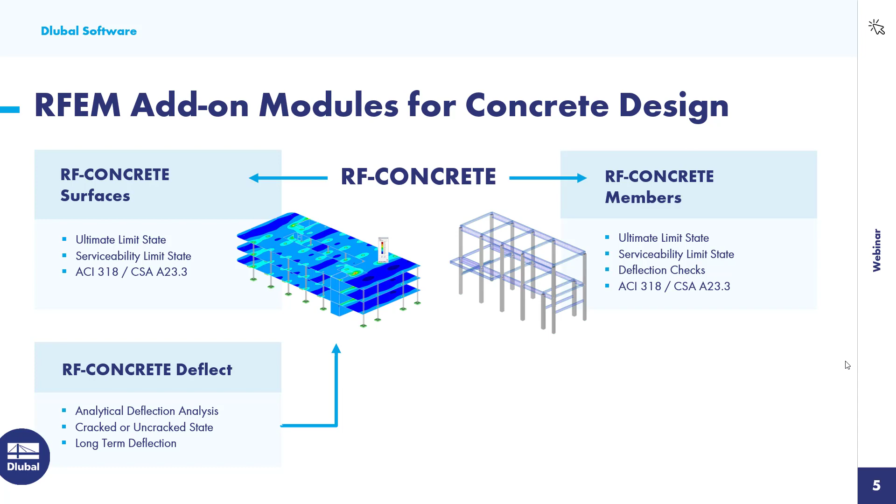In addition to these two main add-on modules, we have a couple of add-on module extensions. The first is RF-CONCRETE deflect. You have to have RF-CONCRETE surfaces in order to run this add-on module extension. This will perform an analytical deflection analysis for our surfaces in either the cracked or uncracked state. We also can consider long-term deflection.

RF-CONCRETE nonlinear will run a nonlinear calculation in the crack state for both members and surfaces. So this add-on module extension is applicable in both of these. This is for the serviceability limit state only. We'll actually take a look at the true crack cross-sectional properties and use this for the analysis.

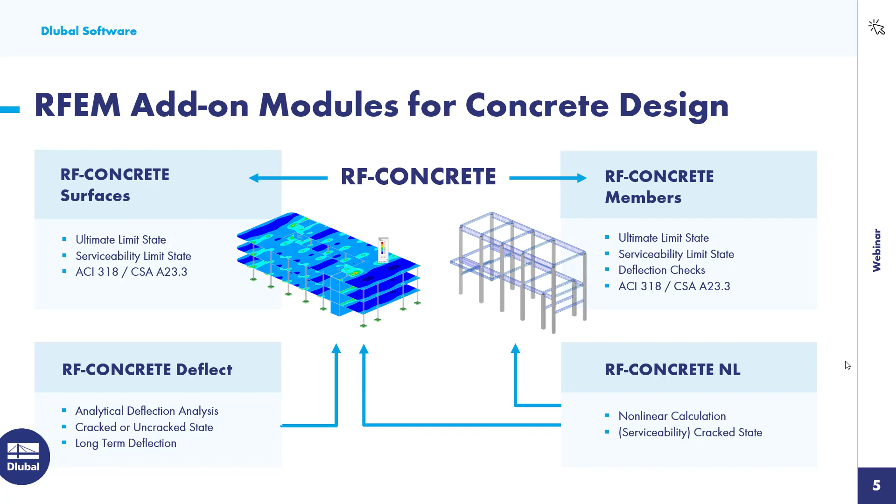Okay, so we can get into our first example today. You'll notice that I already have my concrete model here for the sake of time. It consists of a type of podium structure out in front here, and then we have 3 stories over on the left. We have our concrete core consisting of surfaces for our wall elements. We have horizontal slab elements, elevated slabs, concrete columns, and then we also have some beam elements here that we categorize as rib members, which I'll show you in just a minute.

So looking at our main FEA program, RFEM, we also have the project navigator over on the left that includes all of our input data. For example, I can take a look at all of my materials defined. In this case, everything is 4,000 PSI concrete. If we take a look at the cross sections in the program, we have our 12 by 12 columns defined pretty much everywhere.

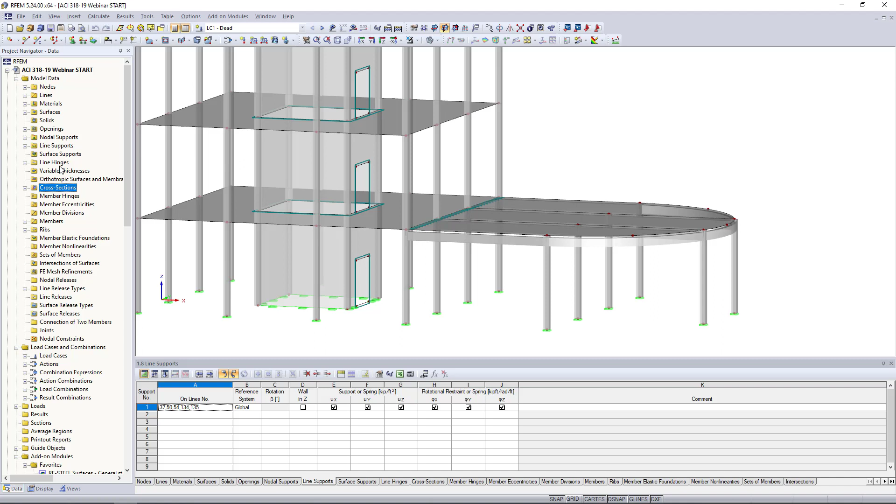We also have these rib members defined as 10 by 18 cross sections. So we can make additional changes here to our input data within the project navigator as we update this graphically, and the project navigator in turn will also update.

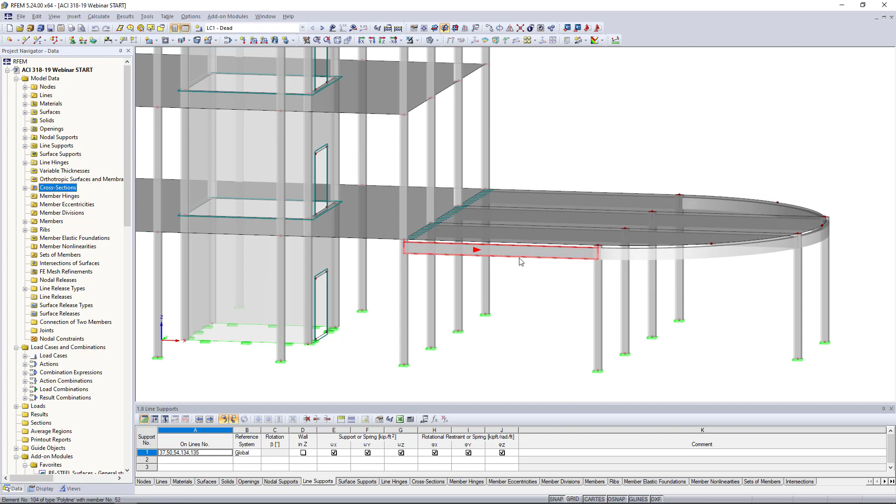Just to cover a few items within the model that may be a little unique, let's take a look at these beam elements here. Notice that these members are dropped down below the slab as supporting members. I can double click on one of these. The member type here, instead of being set to a typical beam type member, which would be a beam or a column, is set to a rib.

When we go into the detail settings of the rib, what makes this a little more unique is that, number one, we can drop it below the thickness of the slab automatically. Notice over on the left here, we can position this on the positive local Z side of the axis of the slab. Then we also can set an effective width on either the left or right side of the member. We can have this automated at L/6, L/8, or input it manually, which in this case I set to 1 foot on either side.

The program will automatically detect the surface that it should integrate with. The intent of this is that we can integrate this effective width on the left or right hand side and consider these internal forces for the member design. Once we get into RF concrete members, this is possible.

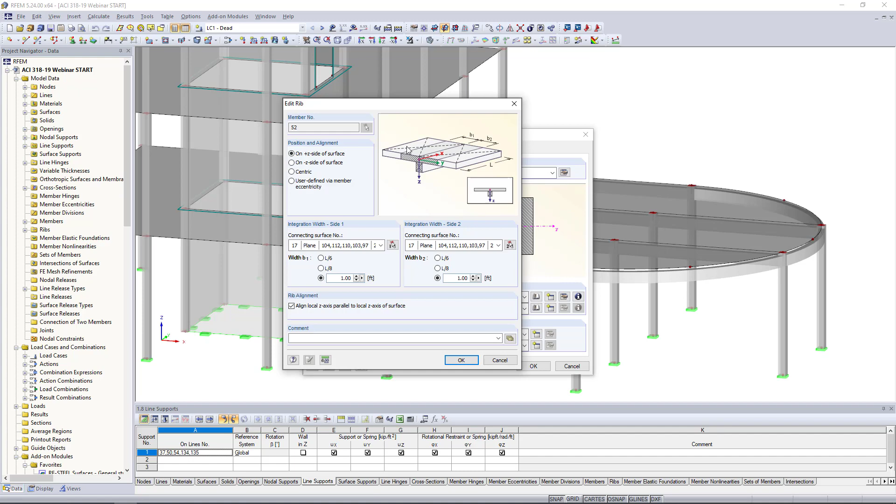So all of these members over here in this podium type structure on the right are considered rib members. You'll also notice this symbol here between our adjacent surfaces. I have my 3 surfaces here in the front, and my rear surface in the back, and then this symbol here is what's called a line hinge.

A line hinge can be added over here in our project navigator. We can right click to add a new line hinge, and what I've done here is I've released the moment between these adjacent surfaces. You'll notice that with a line hinge, we have 4 degrees of freedom. So we have the translation releases, but I want those all to be fully fixed.

But I can release the moment about the line's local x-axis. We're assuming that this isn't one monolithic pour, but rather these 2 slabs are kind of butting up against each other. Translation is transferred between the 2 elements, but we wanted to fully release the moment. You'll notice that these line hinges are applied along the length of these slabs.

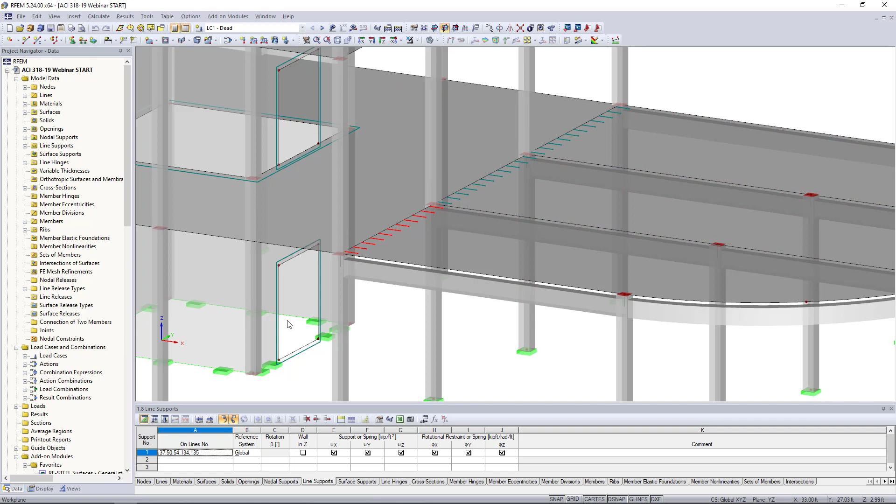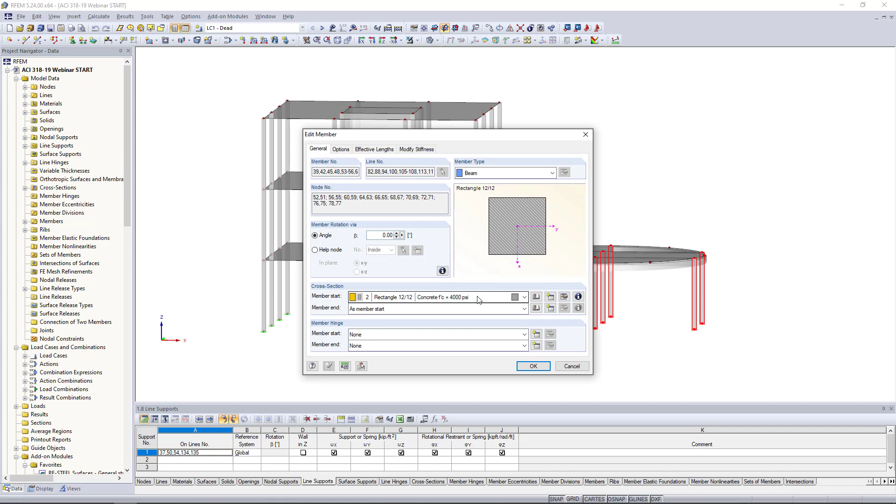When we are designing according to the ACI or the CSA, we know that an I cracked factor should be applied to the flexural stiffness of our members and our surfaces. So if I take a handful of these columns here and double click, you'll notice that we have the Modify Stiffness tab. By default, what we would normally see here is the definition type set to none.

When you are designing for concrete, you would want to come in here and modify this to ACI 318. The program will automatically detect, because of the vertical orientation, that these are columns. We can also see here now that a multiplication factor of 0.7 is applied to the flexural stiffness. This would be the I cracked factor from Table 6.6.3.1.1 directly from the standard.

Now, same concept for our beam members. If we initially edit this member, we take a look at the Modify Stiffness tab. We just want to change the component type here to beams for a different modification factor of 0.35 for the flexural stiffness.

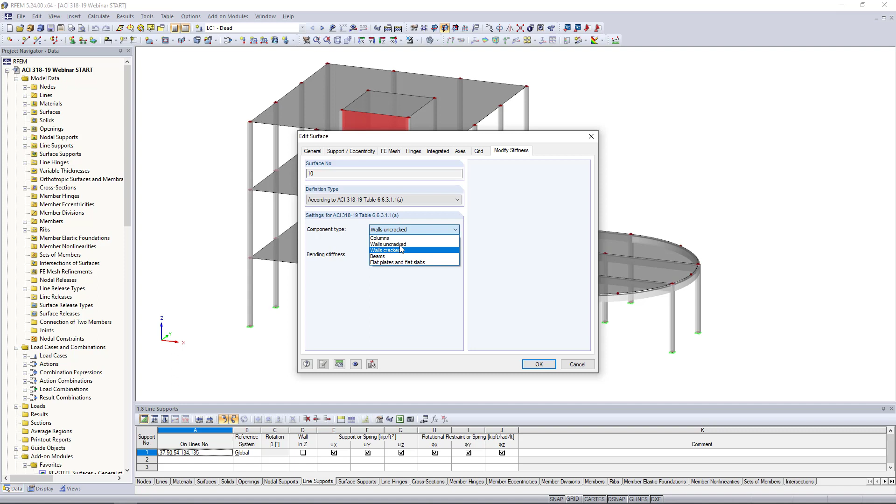Similar to members, when I look at any one of these slab elements, we also have a Modify Stiffness tab. Again, ACI, but the component type is set here to flat plates and flat slabs with a multiplication factor of 0.25. Finally, we have our wall elements with the component type set to walls, uncracked or cracked. This has been done for every element here within the model, and that is very important if we're designing to one of those standards that we want to take into consideration.

Before moving on to the loading, there's one more element I'd like to take a look at, and that's the FE mesh, which is incredibly important for any finite element program, that we are correctly setting this mesh size. Under Calculate FE mesh settings, you'll notice that the target length of the finite element by default is set to 1 foot.

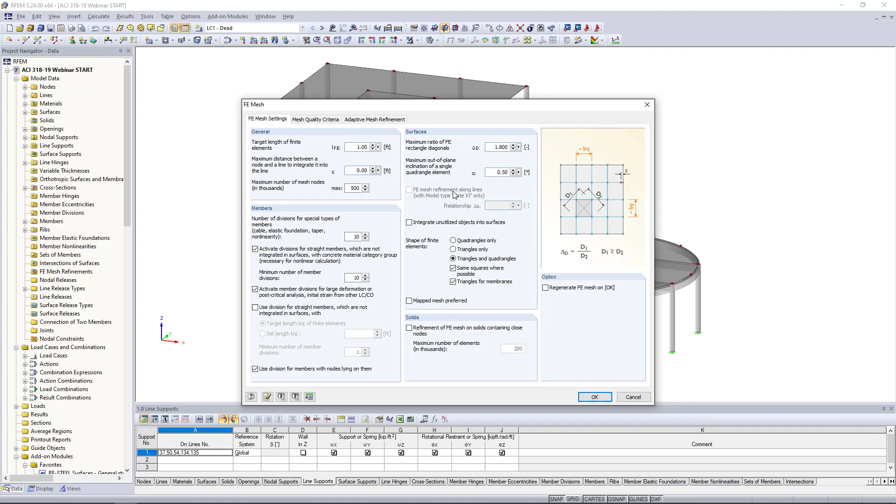So when I keep these default settings and regenerate the FE mesh by clicking OK, it quickly solves and we have our FE mesh available based on those 1 foot settings. Everything is tied together automatically, including nodes, lines, members, surfaces, walls. Everything is done by the program, so we don't need to do any of those factors manually.

But the question is, is this mesh too small? Is it too big? Will it produce accurate results? We have a nice feature here under FE mesh settings that's relatively new within the last few releases called the adaptive mesh refinement. This is a tool within the program, and I'm going to jump back to that PowerPoint to explain this a little bit further.

We always have this question in any FEA program: is my mesh too big or too small? We know that if we set the mesh to something too big, we're not going to get accurate results because we're only getting results at every FE mesh point. But if you set it to something too small, sure, your results will be incredibly accurate, but you may be waiting hours, possibly even days, for the model to solve, depending on how big the model is.

So what we typically recommend is a manual result comparison with FE mesh variation. This means we set our mesh to something we think would work, run the analysis, and take a look at the results. Then we decrease the mesh and compare our results to the decreased mesh from the larger FE mesh. If our results are changing drastically, we know we need to continue decreasing the mesh until we're not really seeing any variation within the results.

Now, this is a manual process. What this adaptive mesh refinement tool has allowed us to do is automatically perform this process instead. The FE mesh is automatically recreated based on the results from the previous calculation step. This is based on the Zienkiewicz-Zhu method. Essentially, the program will take a look at the results with one FE mesh setting and compare it to the FE mesh results for something where we have refined it.

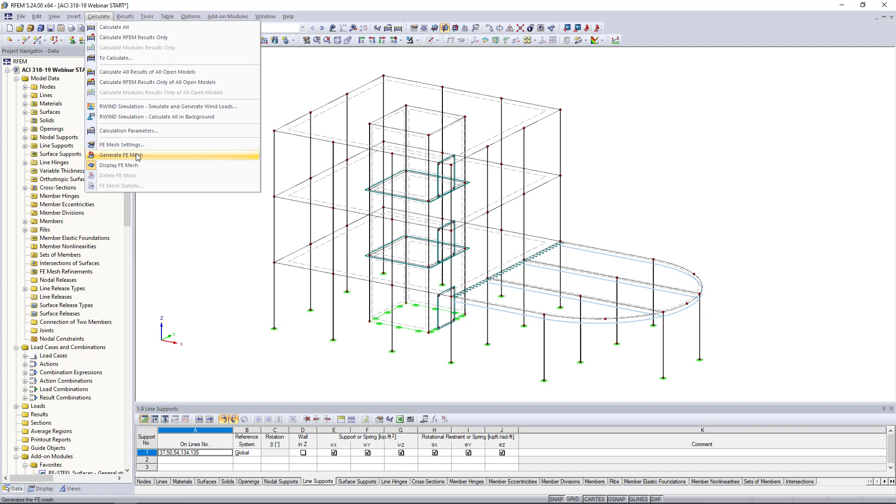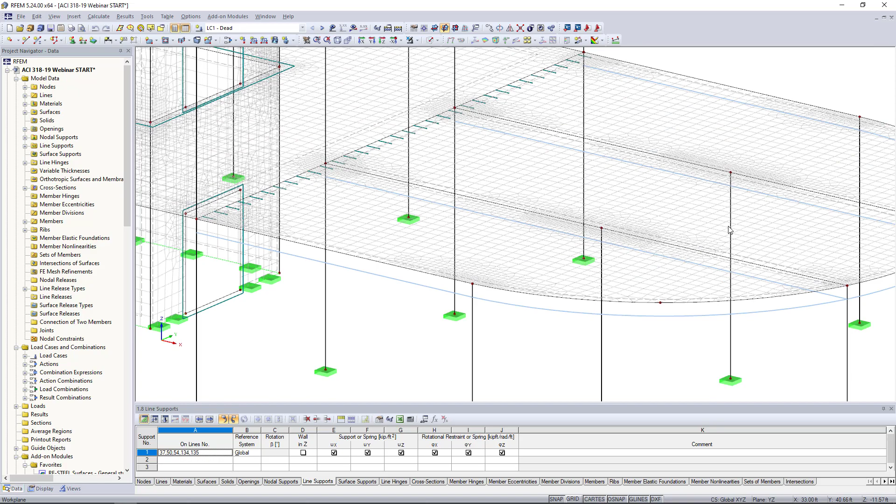When I go to calculate, generate FE mesh, the model looks as though it's almost running an analysis calculation, but in reality it's just comparing those results from one mesh to the other, taking into consideration that error tolerance. Once this is complete, we now have a finer FE mesh, especially where these columns are framing into this 2D surface. We also have a much finer FE mesh where these wall elements are meeting at these corners. This is a pretty powerful feature if we just want to automatically apply all these mesh refinements.

Now, I've given plenty of webinars before where I've manually applied FE mesh refinements to my model.

If you're looking for more control, you would want to manually add these FE mesh refinements, which is available in our Project Navigator. This is a great feature if we want to quickly refine the FE mesh to have a reliable FE mesh length size across the entire model.

Now that we've completed a quick overview of the modeling of the structure, let's move on to loading. Under my load cases and combinations, you'll notice I have created just a few load cases here. In reality, for a true model, we'd probably want to set many more, but for today's example we have a dead load case, a couple live load cases, and a wind load case.

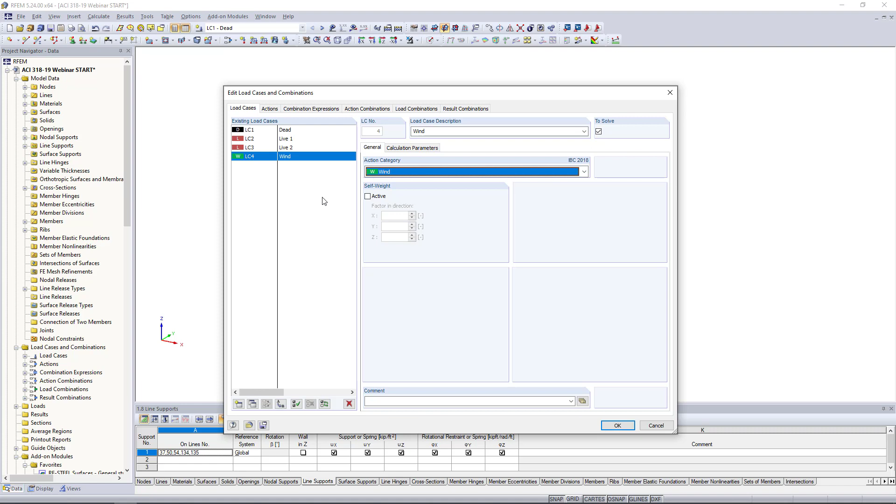These action categories are important because they set the load factors in our load combinations, according to the IBC, since those are the load combinations I'm generating today. When we look at our combination expressions, you'll notice I have my LRFD load combinations and my ASD, and I can click this info button to see directly from the IBC 2018 what those load combinations look like.

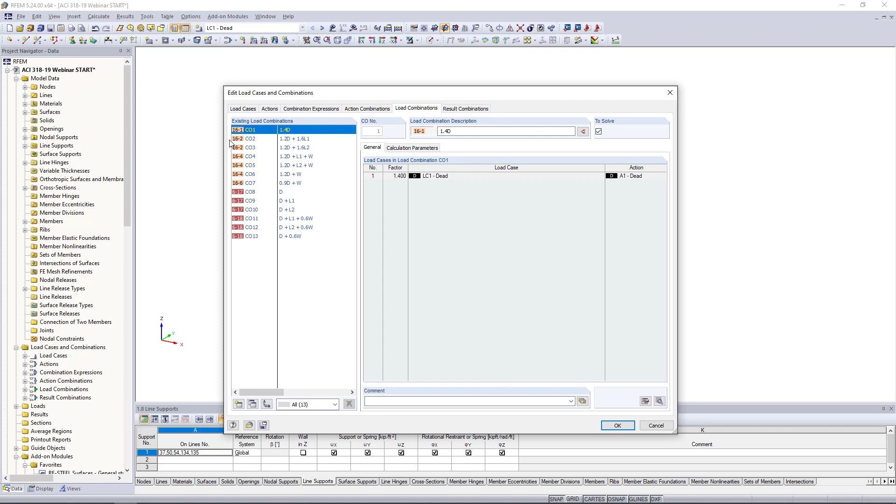Most importantly, under the load combinations tab, here are my LRFD load combinations listed in orange and my ASD listed in red. All load combinations by default are set to a second order analysis considering P-delta effects, which is required by the ACI.

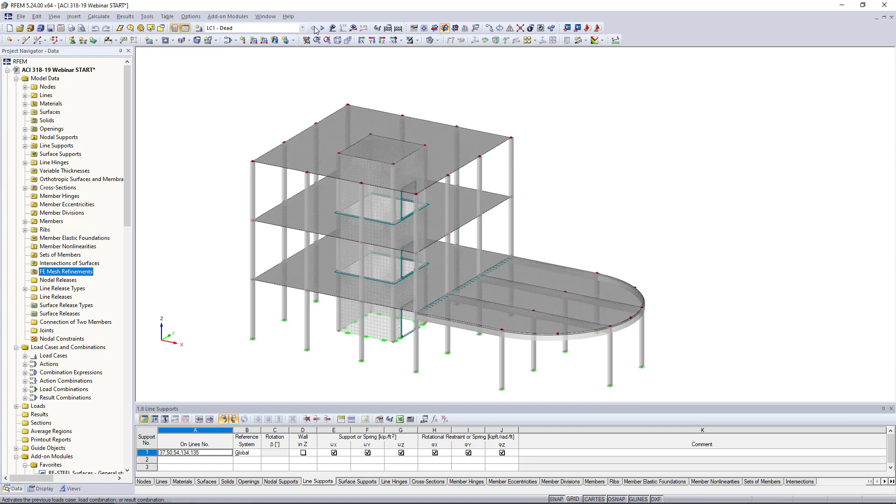Once we're done setting up these load cases and combinations, we would apply the loads to our structure. Taking a look at the dead load applied, these are just simple surface loads applied to every level, 0.05 kips per square foot.

Taking a look at the live load, we've added quite a few free loads. Notice these free loads are applied to only particular sections of these surfaces, not everywhere. Looking at our second live load case, we have a different arrangement here, so this might be live load considerations we wouldn't want to consider together, but one or the other.

So I've set up my load combinations so that they're not considering both live loads together, but rather the load combinations will consider live load 1 or live load 2. Finally, a simple lateral load is applied to every diaphragm level, every story level, in the global Y direction.

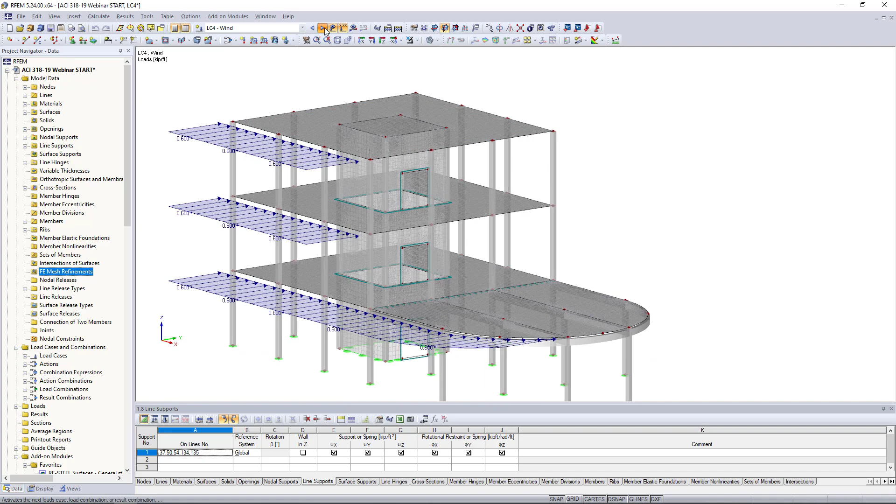Nothing too complicated. Now we can view our load combinations displayed together, which shows our dead load, our live load, and our wind load acting on the structure. Now that we're done defining our loads, we're ready to run our calculation.

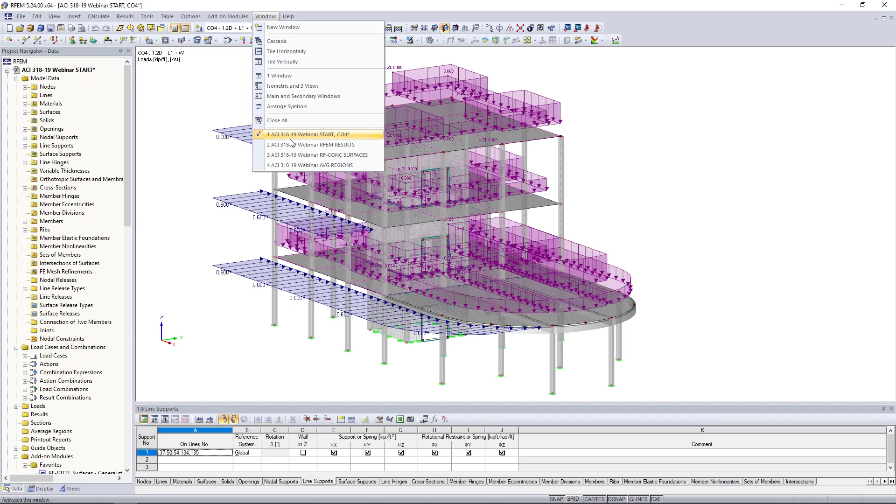I can go to Calculate All. For the sake of time, I'm going to pull open a model that I've already run this calculation on, since it does take a minute because of some of these additional FE mesh refinements. So what we're presented with here are our results once we run our calculation.

The results tab is now available in our Project Navigator, and we can view our global deformations for all of these different load cases and combinations. Notice you can control the display factors here to decrease this.

We have our colored panel within the global deformations, and we can also smooth the color transition to make this look a little nicer. Deflections are important to make sure we understand that our model is behaving correctly under the applied loads, or if we made a modeling error. Everything looks to be okay for the general deflection.

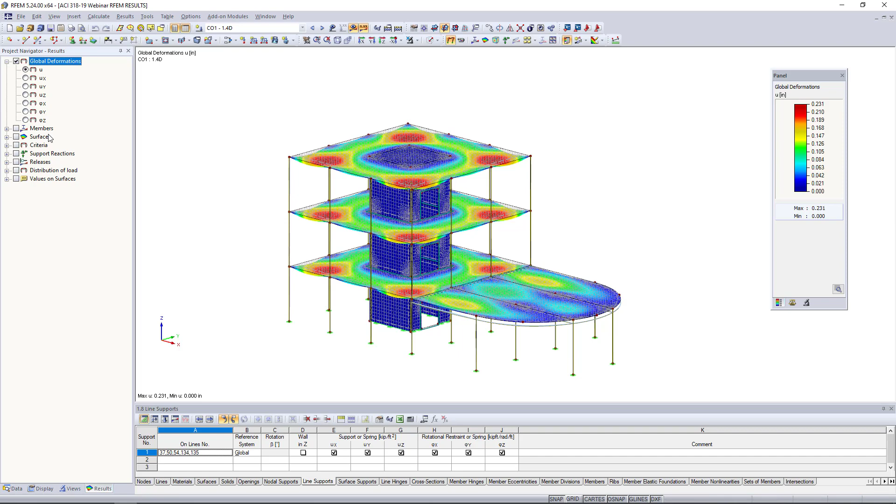In addition to our global deformations, we're probably very interested in our internal forces, and we'll start off with the internal forces for our members. I'll isolate a few columns here by choosing the visibility of the selected objects.

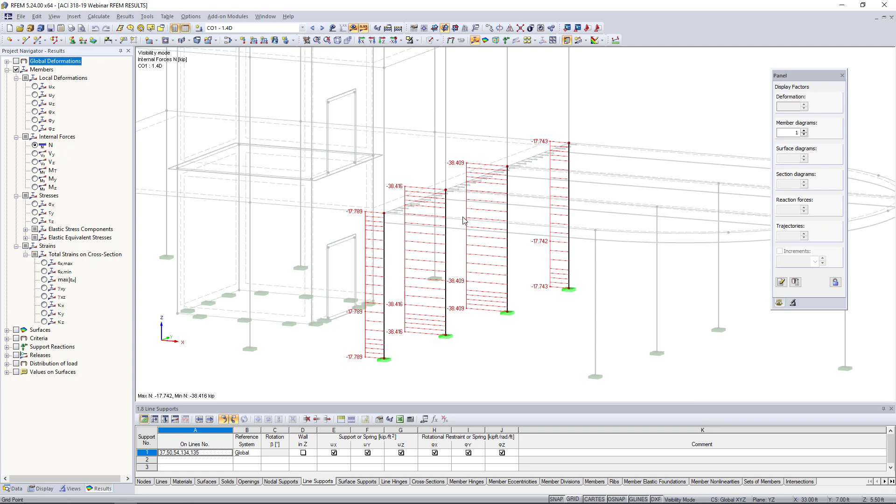When we look at these columns, we can view the axial loads, and we can see all of these are in compression, as we would expect. We can also view the shear forces in the strong and weak axis directions, and we can view the bending moments as well in both directions, and so on.

All of this information we're viewing graphically is also available in table format. So we can view Table 4.0, the results summary, and take a look at the members for the internal forces.

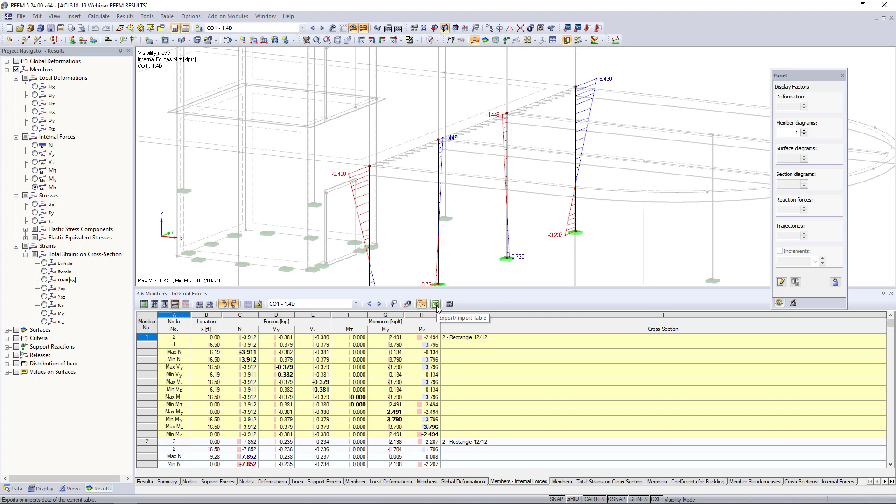All of this information can be exported directly to Microsoft Excel with the click of a button. This is important if we're wanting to do our own manual design with our in-house tools or maybe an Excel spreadsheet

We can also right-click on a member to visit the results diagram, which will show me in more detail my internal forces, deflections, and strains along the entire length of the member. We can switch load combinations or load cases at the top, export this to Microsoft Excel, and add it to our printout report.

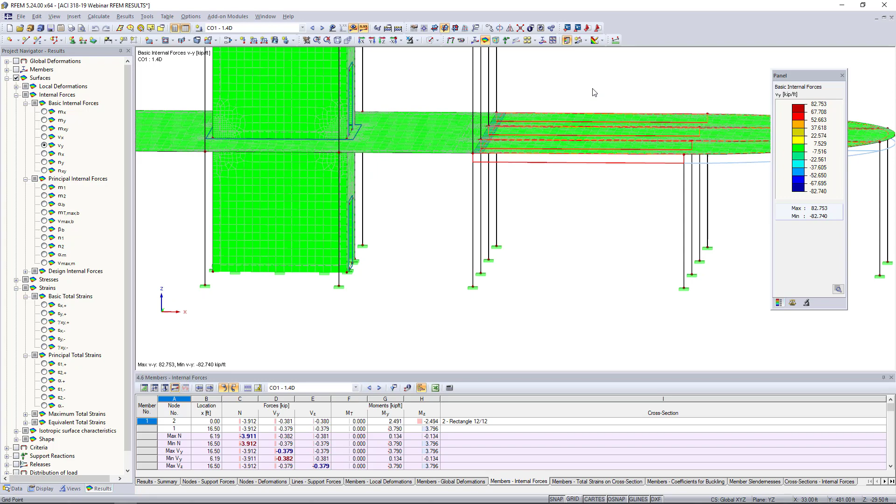So this sums up a basic overview of our member analysis results. Let's take a look at our surfaces. I'm going to cancel my visibility mode here, and instead of all surfaces, let's isolate these front surfaces by creating a visibility by selected objects, so we can take a look at the basic internal forces for this member.

We have our colored panel here showing us our MX bending internal forces. We can also cycle through different load combinations and view MY. These basic internal forces are based on the X, Y, and Z axes, the local axes of our surface. When I hover over one of these surfaces, we can see the local axes given to us.

When we're looking at the principal internal forces, the next available tree here, you'll notice everything is based on these principal axes, which are the extreme values of the internal forces. So we have M1 and M2, for example, where axis 1 is based on the max value of our internal forces, and M2 is based on the minimum values - just a different way to present our results here.

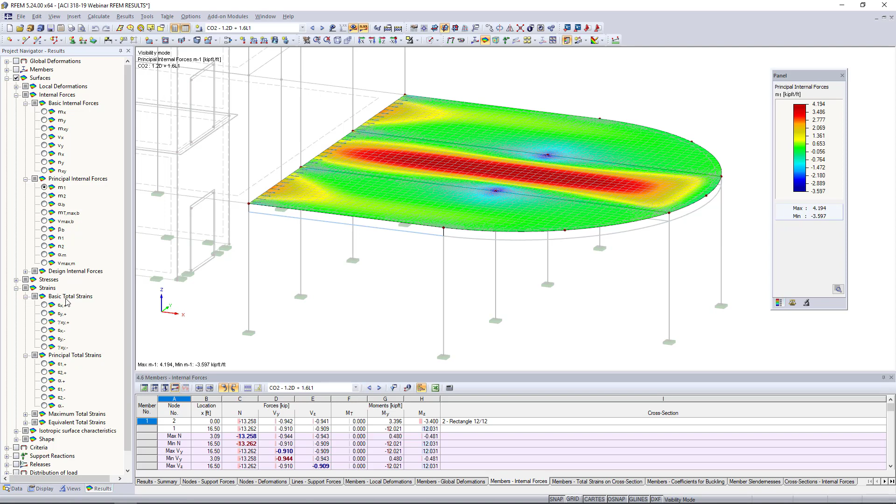Now, of course, we also can view strains. Strains might be interesting for us for concrete design. So everything is visible here.

This information is available to us in table format. If we scroll all the way to the right-hand side within the tables, we can view the strains, or we can view the internal forces, and this is for every grid point within the surface. So we can export this information to Microsoft Excel, again, if we'd like to do our own manual design.

So the next topic, after we've covered the analysis, is of course we want to design these members according to the ACI standard. Assuming we want to take advantage of our add-on modules within the program, we can see these listed within our project navigator. You can always right-click on an add-on module to make it a favorite, to move it up to the top of the list. Or we can access add-on modules under design concrete for RF members, for surfaces, or for members.

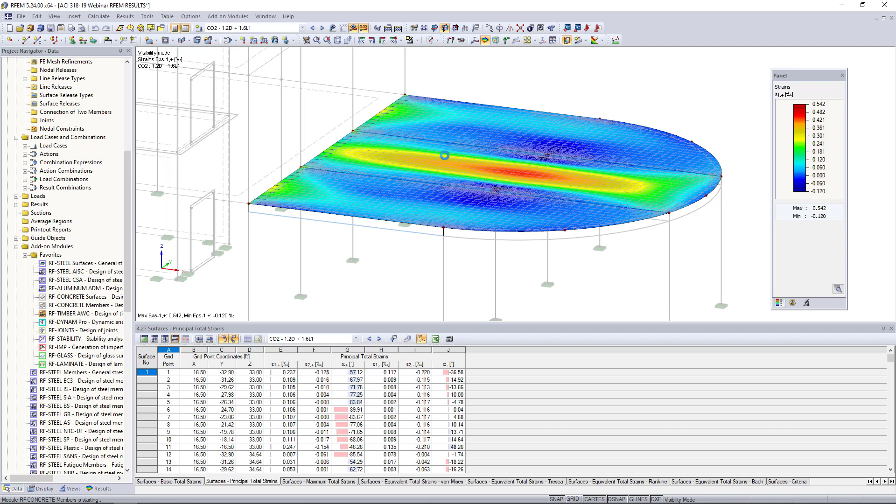Before we jump into the actual add-on module, I want to go over several of the 2019 updates that have been considered within the program. I'll preface this by saying this is by no means a complete overview of all the modifications or updates within the 2019 standard that was recently released, nor a complete list of everything affected within our program. It's just a few I wanted to highlight, some major changes that took place.

So the first is the reinforcement strain revisions. According to section 7331 for non-prestressed one-way slabs, but also 8331 for two-way slabs and 9331 for beams, the code tells us these should all be tension-controlled elements according to table 21.2.2.

You'll notice that in figure R21.2.2B from the standard, which I pulled over here, our tension controlled area within this graph for the strength reduction factors has now been modified. This lower limit strain value has been modified according to this section here.

So we're now taking into consideration the yield strain in the extreme layer of the longitudinal reinforcement plus 0.003. Previously this value was just a simple 0.004 in the 2014 standard, so this was a major change within this section. Now, this leads to a more economical flexural design for beams and slabs. We don't have this requirement anymore to add additional tension steel to meet the lower steel strain limit of 0.004, but rather now this is a function of our yield strength of our reinforcement.

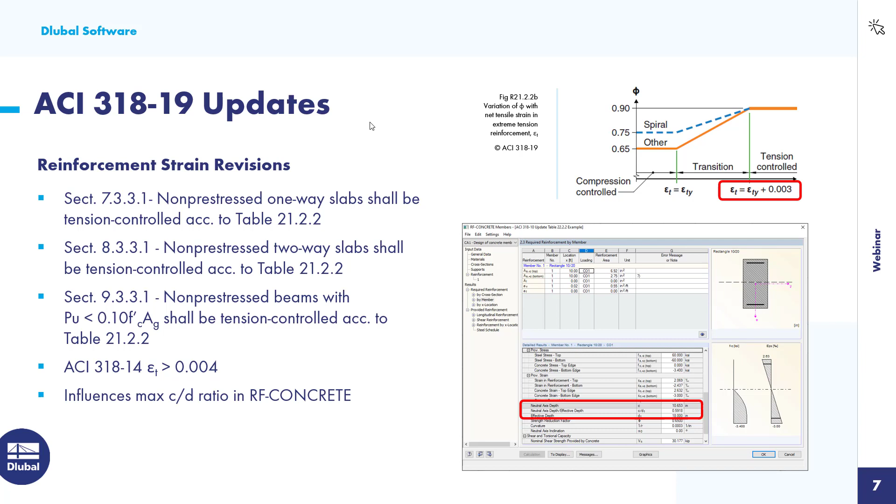So what this previously meant was really little, if any, gain to the flexural strength because of the reduced strength reduction factor. This is obviously going to affect our add-on modules, RF concrete members and surfaces in several ways, but the main change you'll notice initially is an influence on the neutral axis to depth ratio, which you can see in the results within the add-on modules.

The next update was the minimum flexural reinforcement for slabs, section 8611 for two-way slabs. AS min is now 0.0018 times the gross area. Previously in the 2014 code, this minimum area was based on the reinforcement type and grade, so now it's a more simple approach, just times the gross area. This is the same requirement as temperature and shrinkage, but the code wants us to apply this to the tension face of the slab element.

How this influences our add-on modules: this purely affects RF concrete surfaces, and it's going to influence the minimum longitudinal reinforcement. So we'll see those updates within the add-on module there.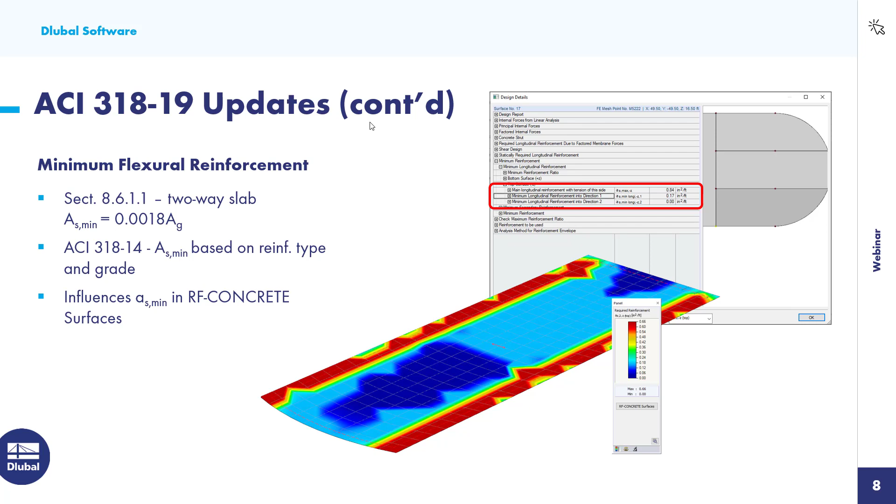We've also introduced the size effect modification factor, lambda s. The code tells us that previously, if a member depth doubles, the shear capacity of that member may not necessarily double either. So this size effect modification factor has better control over that rather than simply doubling the value. Again, ACI 318-14 previously had provisions for equations for members without axial force versus members with a compression force versus members with a tension force. So again, much more simplified.

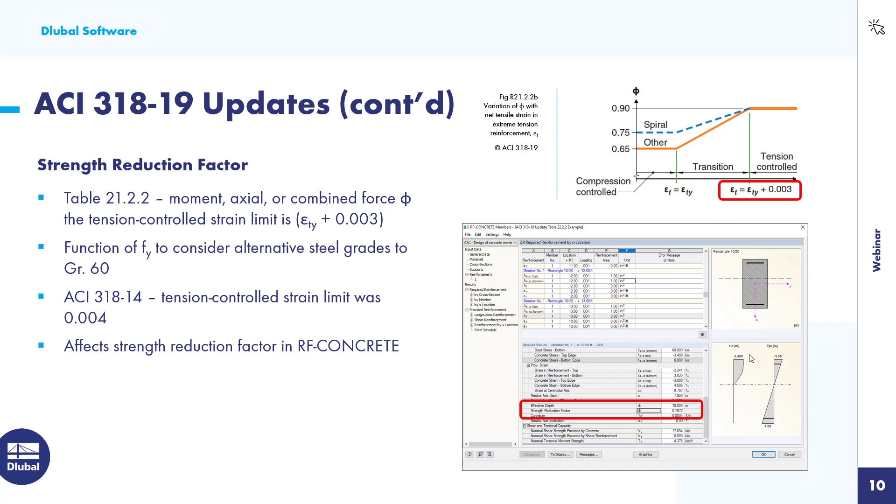Serviceability requirements, from table 24.2.3.5. There are now revised equations for the effective moment of inertia, I sub E. We can see that from the table over here on the right-hand side, taken again directly from the standard. Previously in the 2014, the equations underestimated the member deflection with low reinforcement ratios, and this was primarily slab elements. What we'll see now is that this will inevitably affect the deflection calculations in both surfaces and the members add-on module.

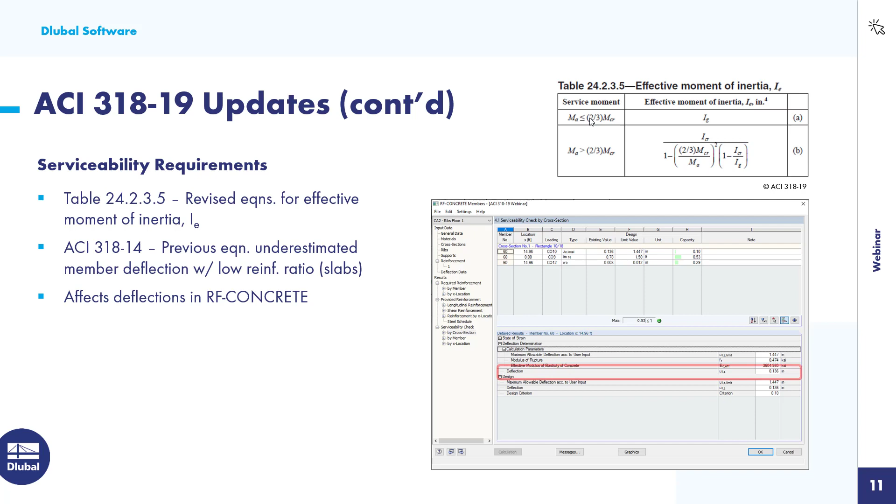Okay, so let us go back to our example today then, and let us continue on with the design within these add-on modules.

So you'll notice that when I speak of add-on modules, it's nothing more than this dialog box that will come up within the main program RFEM. And we will want to select here now the ACI 318 standard. You'll see the 2014 still available in this drop-down box.

We can even click this filters button to show even older standards if we'd like. The strength limit state will be our LRFD load combinations for consideration on the right-hand side. Our serviceability will be all of our ASD load combinations. Notice we can activate a nonlinear calculation, which will activate that add-on module extension, if we remember way back when from the PowerPoint, for RF concrete nonlinear, but we won't be utilizing that today.

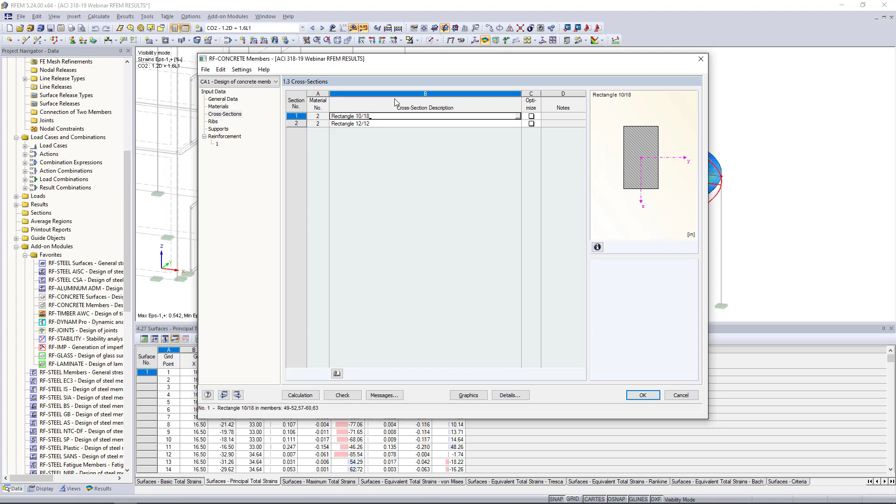Now it's really just as easy as moving down the list here. So we have our materials. 4,000 PSI was brought in from the main program RFEM. We would set our reinforcing steel grade here. We'll use grade 60. The cross sections are also both available to us here: our 12 by 12 sections, our 10 by 18 sections. Our ribs table is showing us all of these rib elements, if you remember, that are taken into consideration the effective width.

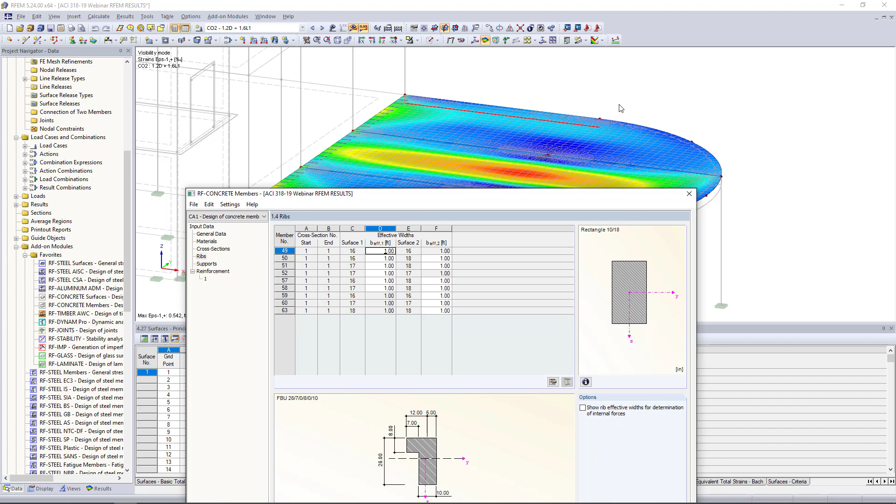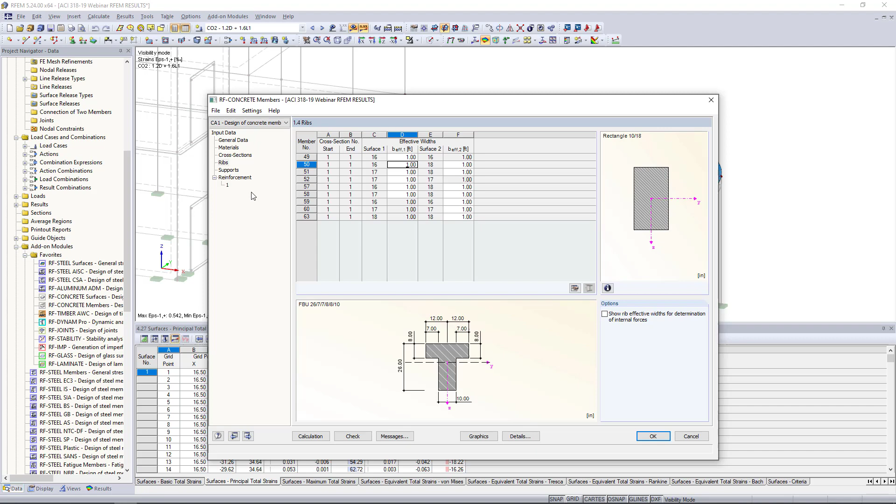So the program has recognized that we've set an effective width of 1 foot. It's also smart enough to know there's no surface on the left-hand side of this member, so we don't really want to consider that. Of course, you'll notice it looks more like an L-shaped beam. But when we look at some of these additional members embedded in the interior here, which you can see highlighted in red as I click on it within this table, well, it looks more like a T-beam here because we have effective width on both the left and right-hand side. So just reiterating that information because we can design these rib members within RF concrete members.

These supports - what this means is that we can graphically select supports here. Let me cancel this visibility. We'll turn off our results here. And I can select nodes. You'll notice node number 63 and node number 71 if I was designing this rib member out in front here.

The supports allow me to define the support width, and in this case, this would be our 12-inch columns that these rib members are framing into. Is it a direct support, or is it framing into the face of this column? Is it a monolithic connection? Is it an end support, or is it not? And you'll notice this picture updates automatically over on the right-hand side.

The whole intent of this is, number one, we can consider a moment reduction according to 6.6.5. This is unchecked by default, but you can take that into consideration. But more importantly, two, we can reduce the shear forces based on a distance D away from the support face according to 9.4.3.2. So that's the intent of these supports. We won't be designing the ribs for today's example, but just to give you a brief overview.

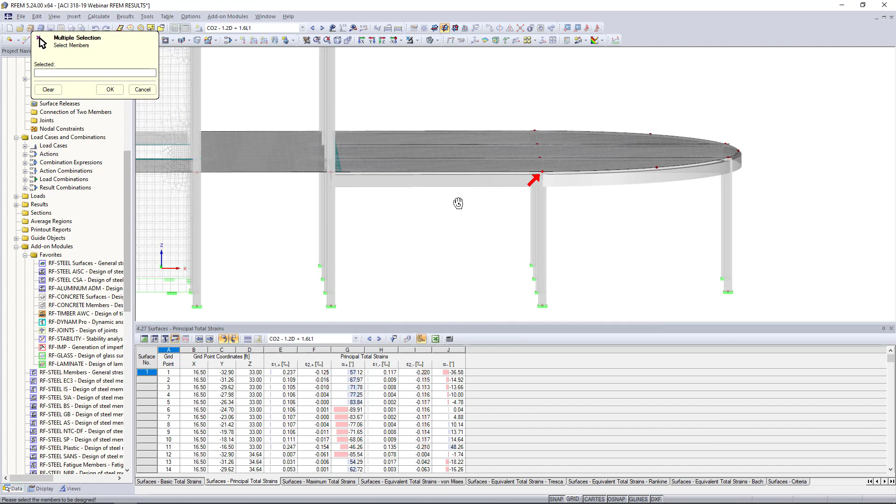And finally, we have our reinforcement tables. So what this allows us to do is to lay out the reinforcement for our members. We'll begin by giving this one a description, so we'll design just a few columns. Now, rather than applying this reinforcement to all of my members and designing all of them, let's just choose our 4 columns down here at the bottom with maybe a little bit higher axial loads that we can initially design. So you can see those listed here.

We want to define the longitudinal reinforcement. So what I can do here is choose a couple reinforcement diameter sizes. Maybe I only want to choose one for the program to select from, and this will essentially optimize based on the best design setup. The minimum spacing is set to 0.75 inches. The anchorage type is also selected from this drop-down. Notice this picture will update depending on our settings. We will calculate the development lengths as well.

The curtailment type allows us to define different reinforcement zones. So if we need higher longitudinal reinforcement for bending in some areas of the member but not others, we can actually optimize that. No curtailment just means we're going to place the same longitudinal reinforcement throughout the entire length of the member, but we can modify this to different zones if we'd like.

The ties and stirrups. For this, I'm going to select number 4s, for example, from my checkboxes here. We can set the number of legs per section, set the anchorage type, and also control the spacing.

Similar to the longitudinal reinforcement, we have the ability to use uniform spacing throughout, or we can change these to zone-related spacings. Spacing limits is checked by default to consider the maximum stirrup spacing according to the standard, the ACI 2019.

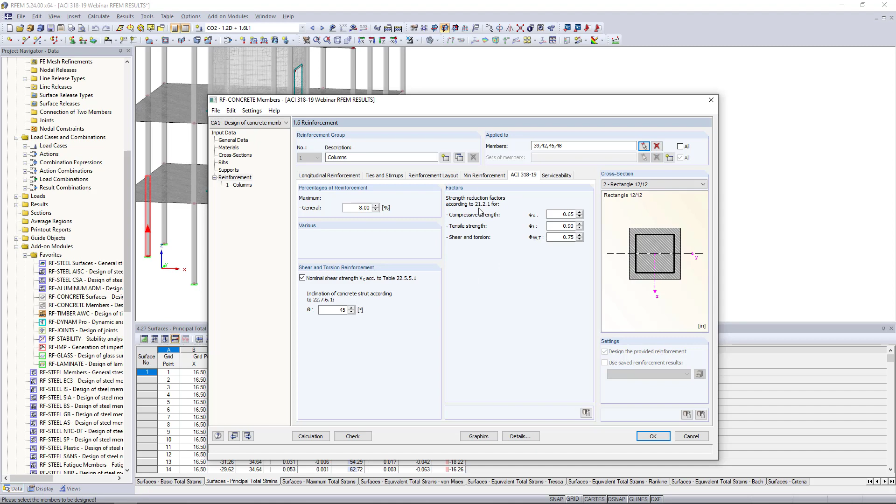The ACI 318 tab is specific to the standard. It has some additional settings, such as the percentage of reinforcement, shear and torsion reinforcement according to chapter 22, and our strength reduction factors, which come directly from chapter 21. So no modifications to this table here.

Serviceability allows us to set a limiting value for the allowable crack width. Within this drop-down box, we have some suggestions from the ACI committee on different allowable crack widths. For our case today, we'll choose this last one for a dry air protective membrane, 0.016 for both the top and bottom crack width.

This first setting, to design without direct crack width calculation, refers to the longitudinal spacing requirements set by the code to limit cracking. So we can leave this checked, and the program will optimize that spacing to make sure it meets those requirements.

Design with direct crack width calculation is more of a theoretical approach. We will apply the Gergely-Lutz equations to actually calculate the crack width. So both of those we can leave checked.

Now we also can turn on the deflection checks, and notice we now have a new table available to us, deflection data. We can also activate long-term deflection according to chapter 24.2.4.1, which applies a time-dependent factor to our deflections based on the duration of the load.

Now looking at the deflection data, you'll notice all 4 of my members are listed, with the reference length including the full member length of 16.5 feet. The pre-camber, we could add that in as well.

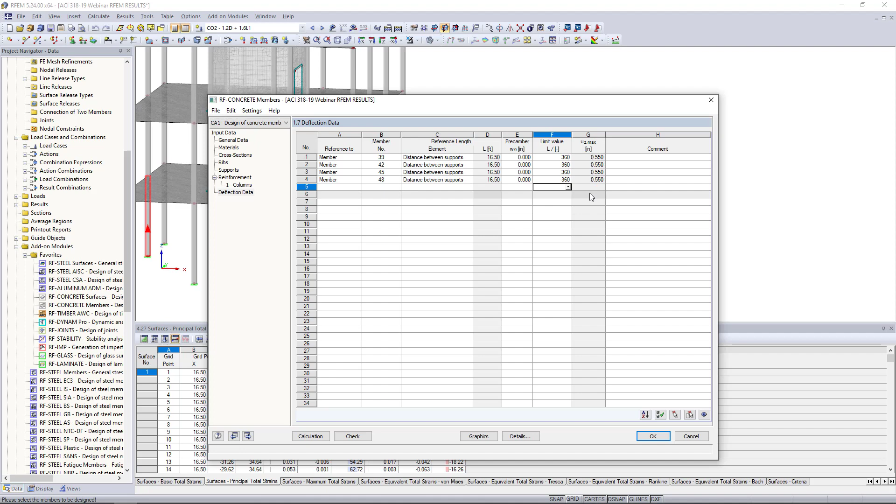The limiting value we can select from this drop down, or we can use our own user defined. For this option, we'll choose L/360. What I can do is hit F8 on my keyboard to make that same change to every single cell as I move down my list. So now my limiting deflection is going to be 0.55 inches.

So now we are ready to run a calculation, and you'll notice that this will actually solve very quick. We already have our internal forces from the analysis. All that we're doing is applying these equations from the ACI to determine our reinforcement.

You'll notice it does take just a minute though. The program's kind of thinking here, and you can always look at the progress down in the lower left-hand corner. It's calculating the sums and deformations. But the point is that the program will essentially take in all that information from the RFEM analysis into this add-on module.

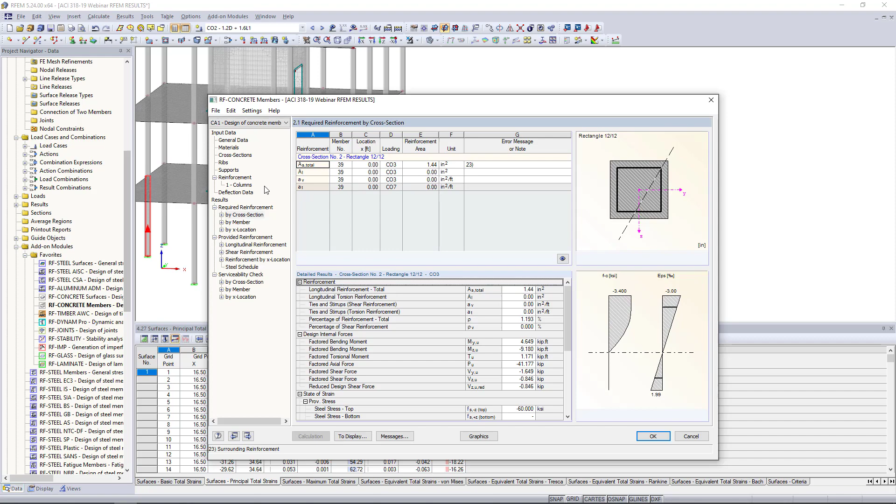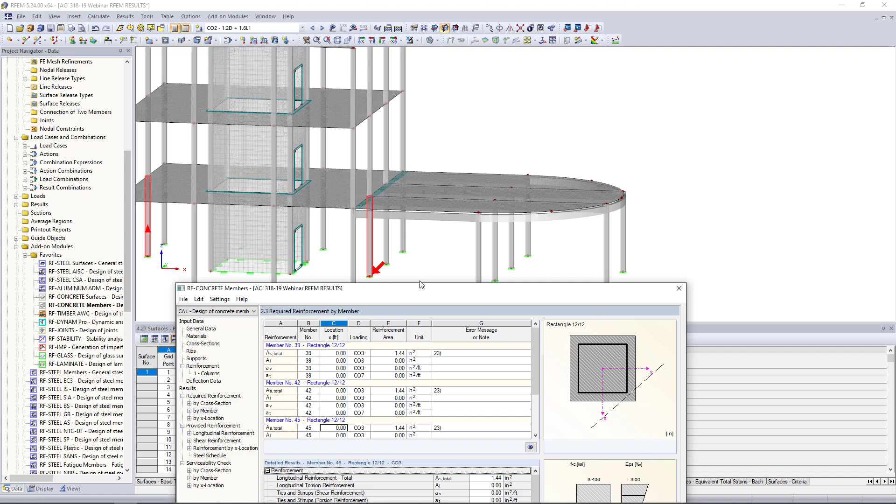Once this calculation is done, what we're going to see is the required reinforcement by member. So what I can do is take a look, and you'll notice my member here is highlighted, probably from when I was in RFEM last, and everything's synced up in the program to the tables within this add-on module. So it's nice to know exactly where you're at.

What we're going to see here is the required reinforcement from the analysis, and this is going to include our longitudinal reinforcement, our shear reinforcement, as well as torsion requirements.

Okay, so once we have this required reinforcement and the given variables are shown here, we'd like to know what the program is actually designing for this member, and that's under provided reinforcement.

For example, we can take a look at member number 39, and this is the longitudinal reinforcement. The program has come up with 4 number 7s located at the corners here. Same concept for the shear reinforcement. We take a look at the program has designed 53 number 4s at about 4 inches on center.

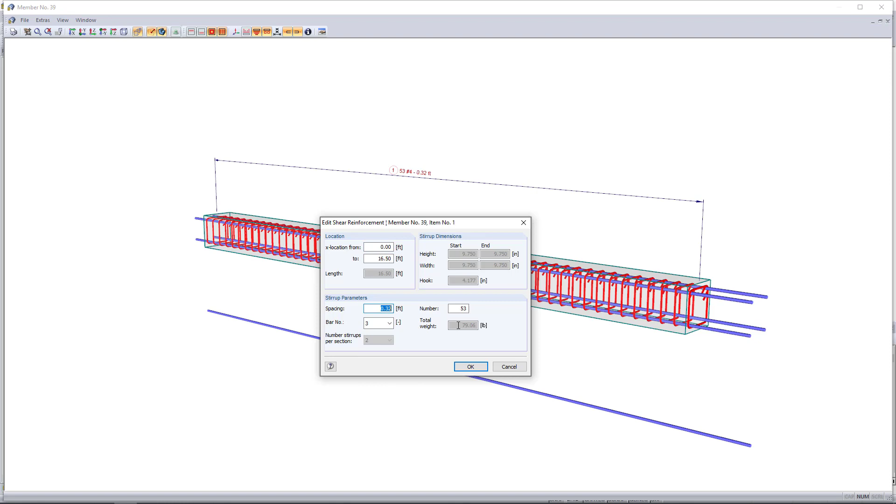What's nice is we can double click within this picture to be taken to a much larger view of our concrete rendering here. If I want to make any changes to the reinforcement, I can do so directly within this picture. I double click on the 53 number 4s. Maybe we want to change this to number 3s here, and we want to do the spacing as 0.25. Who knows? We click OK. The program automatically updates this picture, and I can exit out of this.

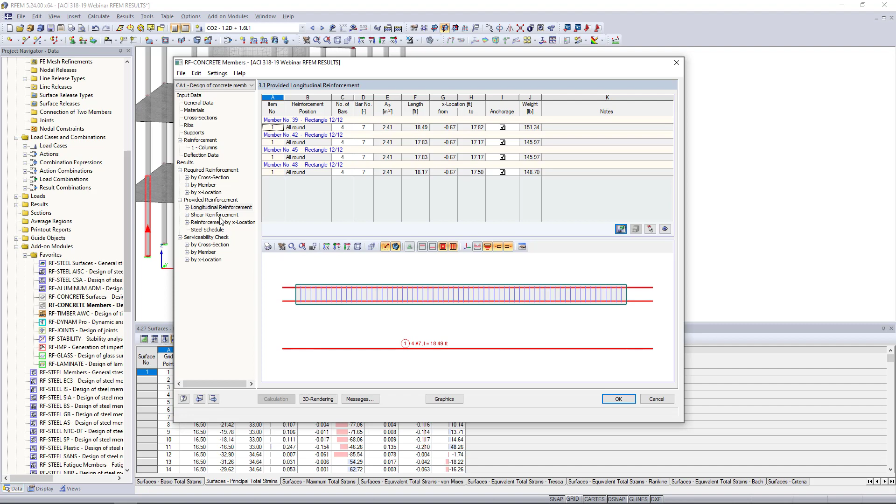When I try and go to a different table, the program says, well, wait a minute, you've made changes to the reinforcement. Let me just recalculate real quick to make sure that you're still meeting all of the requirements. So it does so, and it looks to be that everything is okay.

We also have our serviceability check. Remember, we're checking deflections, we're checking the limiting spacings, we're also checking the crack width. Overall, we're seeing for all of our members here, each of these individual checks with an overall ratio of 0.46. So we have our green smiley face because we are below 1.0. Everything looks to be good there.

Now, in addition to all of this information, which we can take a look at here, we can also take a look at the graphics view. So we are technically within this add-on module RF-CONCRETE members. We are just viewing our results graphically here within RFEM.

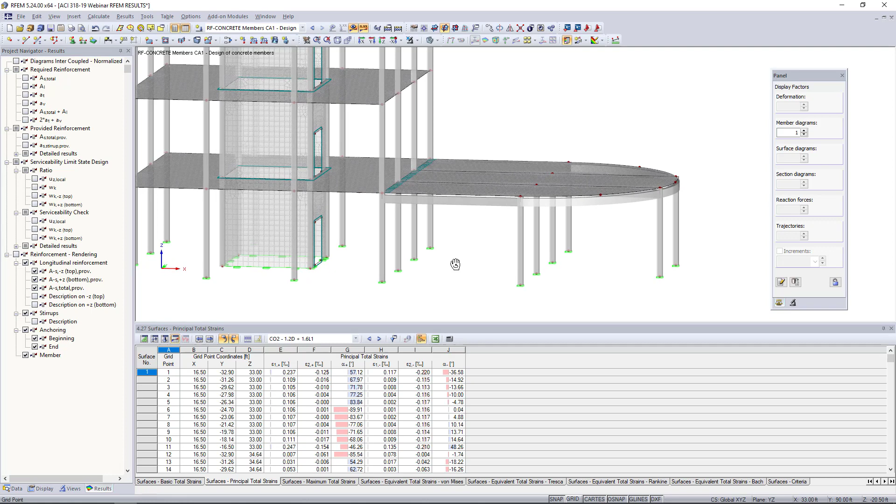Let me take a look at the visibility by the selected objects, and we can zoom in here. We can view the required longitudinal reinforcement for each one of these members. You'll kind of notice how this varies along the member length.

What else we can overlay on top of this is the provided reinforcement. So what we should always see is the provided reinforcement greater than the required reinforcement, of course. And sure enough, we do at 2.41 inches squared.

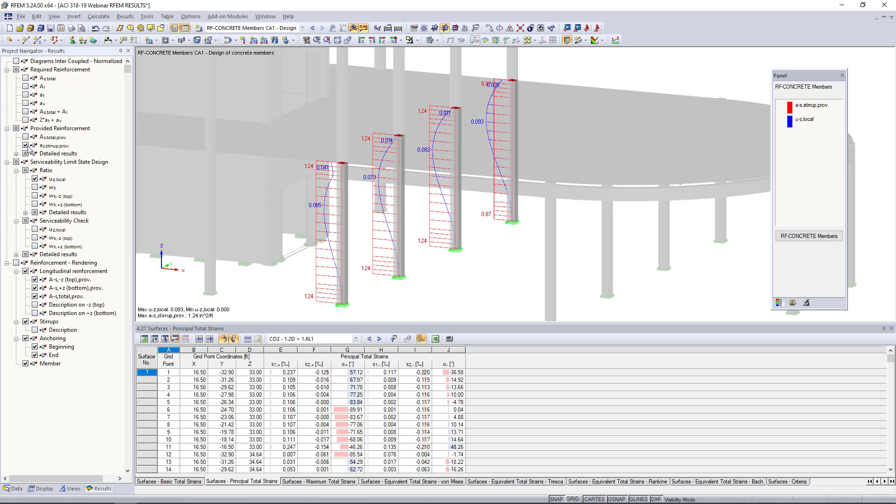Now we can view all of this other information as well, such as serviceability for our deflection ratio checks and everything else. So this is all possible to view graphically.

We also can turn on the rendering of the reinforcement. So this is just a nice view if we want to see all of these stirrups, our longitudinal reinforcement, our development lengths, kind of extending up into that additional column there. So that is a basic overview of RF-CONCRETE members.

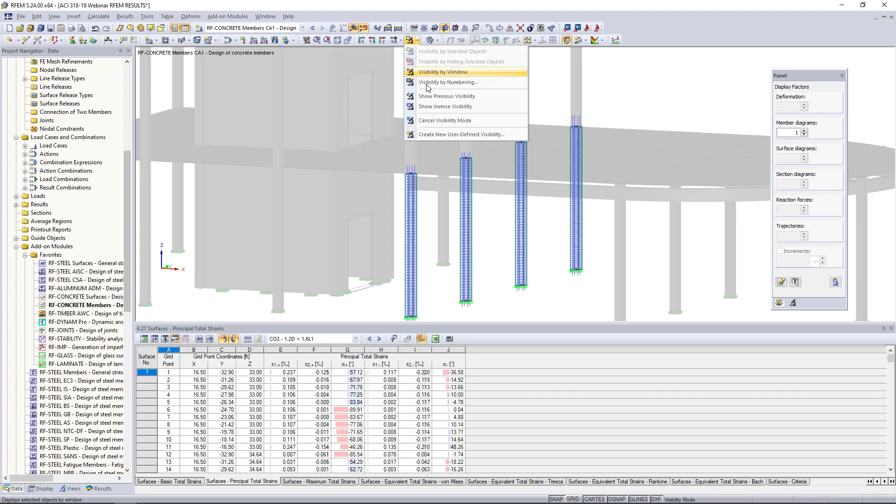Now we would like to move into RF-CONCRETE surfaces. So what we can do here is to jump to our data tab, and we can launch now. Let me cancel this visibility mode, we'll turn off our results. Let's take a look at RF-CONCRETE surfaces.

So what's nice about this add-on module is that once you have kind of found your way around RF concrete members, RF concrete surfaces looks almost the same. And this is true for all of our add-on modules. They have the same type of look and feel to them, so each one isn't different.

We are going to select the ACI 318-2019 here from our drop-down box. The strength limit state, we can select our LRFD load combinations. We can choose our serviceability limit state as well by choosing our ASD load combinations.

Under the detail settings for serviceability, I want to point out that when we go to these edit settings, we have the ability here to activate RF concrete deflect. So this is that add-on module extension we covered in the PowerPoint that is going to allow us to calculate the deflections here for our surfaces. Now this includes long-term deflection with that duration here, where we can take into consideration the time-dependent factor as well. We can turn this off as well.

We also have tension stiffening here. Essentially, we know that the reinforcement will take on tension loads. This is clear, but between two cracks, tension stresses are actually transferred into the concrete as well by a bond.

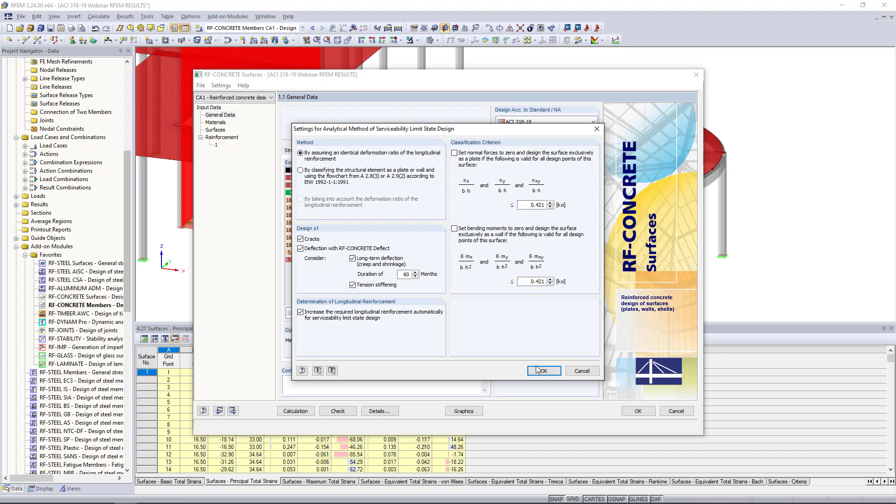So if we wanted to consider that, we can turn this on. You can also visit the help file, which maybe explains this in a little bit more detail, but by default we'll just go ahead and leave that on. RF concrete nonlinear can also be activated within this add-on module, again for surfaces.

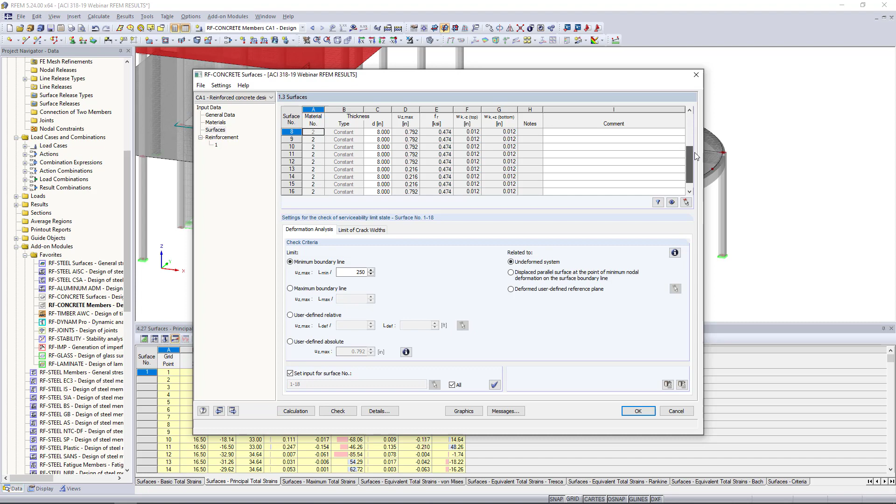So taking a look at the materials, again, 4,000 PSI concrete, reinforcing steel is set to grade 60. I take a look at my surfaces. We have all of our surfaces listed here. This includes all of our walls and our slabs. You'll notice, again, everything is synced up in the background here, which some of these surfaces are a little bit higher than my view.

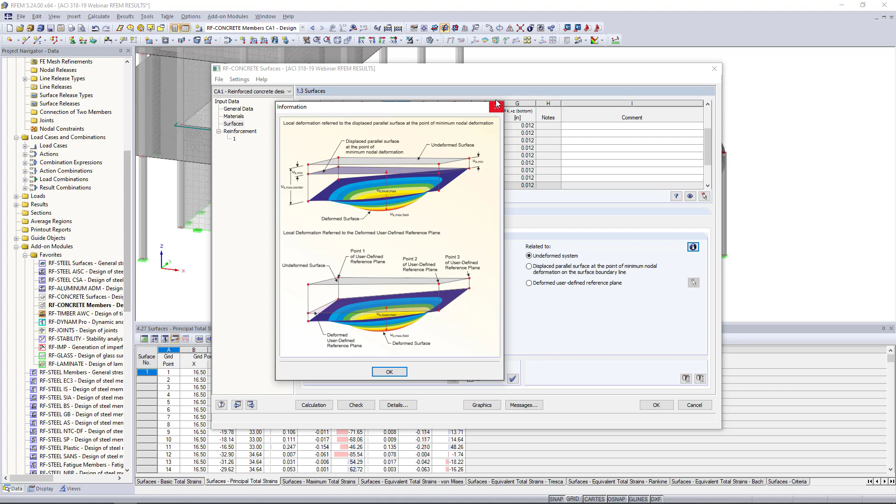For today, we'll be referring this to the undeformed system. Now notice this is applied to all surfaces, but you don't necessarily have to. You can uncheck this and apply to separate surfaces.

The limit value of crack widths, this is identical to what we saw within RF concrete members. We can set our limiting value here based on the ACI committee's findings for dry air protective membrane. 0.016 inches is our limiting crack width. We're going to consider longitudinal spacing based on 24.3.2 to limit cracking. We also will use the Gergely-Lutz equations to design with the direct crack width calculation.

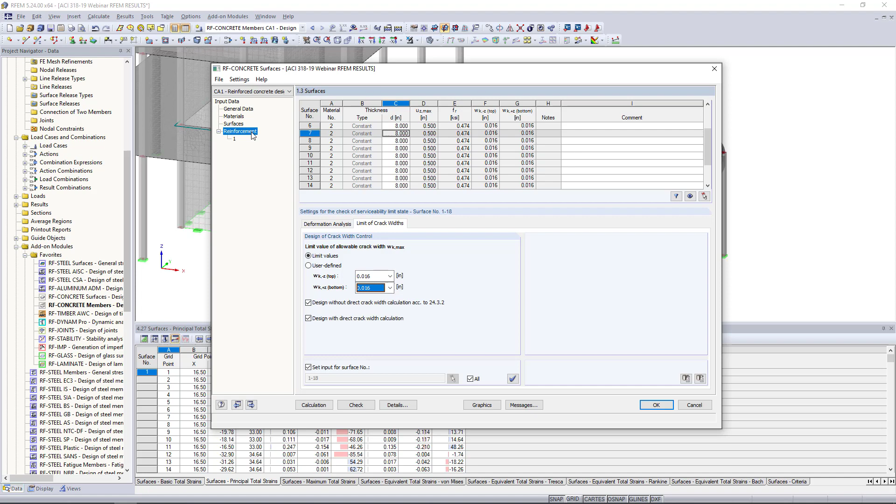So moving on to the reinforcement. The first thing we want to do here is to maybe give it a description, so we'll call this one slabs. And rather than applying to all surfaces, I am going to just design these surfaces out here to begin with, surfaces 16 through 18.

Now the reinforcement ratios, we can see here that the minimum secondary reinforcement by default is set to 20%. So this is the largest longitudinal reinforcement that should be applied. Now all the rest of these reinforcement ratios are based on a cross-sectional area of 1 foot wide within our slab. For example, maximum reinforcement percentage, 9%, again this is based on a 1 foot width of our slab.

The reinforcement layout. So the first thing to define here is our cover, whether that's to the centroid or to the edge. Let's choose the edge here. And again, referring to table 20.5.1.3.1 within the ACI, let's set this to 0.75 inches.

And notice that you can modify the reinforcement direction as well. It doesn't necessarily have to be along the local x-axis. We can change this at some type of angle as well.

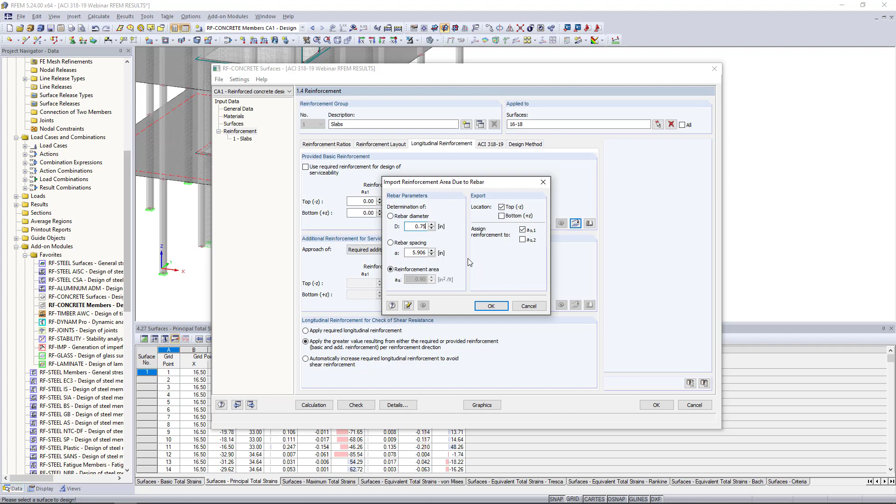The longitudinal reinforcement includes the provided basic reinforcement. So if I know within this slab that I am going to apply at a minimum number 6s at 12 inches on center, we can actually input that in for the basic considerations of the initial analysis. I can import the reinforcement here within my settings, and I can choose a rebar diameter. We know number 6s are 0.75. The rebar spacing will be 12 inches, and we're going to apply this to the top and bottom and in both directions. So when I click OK, the program will automatically calculate this reinforcement area, 0.44 inches squared per foot. Again, this is what will be taken into consideration for that initial analysis.

Now, the other option you have here is to use the required reinforcement instead. All that you need to do is to have the program, or we'll define the diameter here, and the program will determine the reinforcement area needed.

And that's what it will use for the serviceability analysis as well. This takes into consideration the required reinforcement from the ultimate limit state, and uses it as the applied reinforcement for the serviceability limit state - the additional reinforcement for the serviceability state design.

If the program determines these number 6s at 12 inches are not adequate, it will go ahead and apply additional reinforcement. What do you want to use for the serviceability design? Your options are available within this drop-down, and my biggest piece of advice to understand what these are is to take a look at this info button, which explains perfectly what you are setting for the serviceability limit state design if our reinforcement is not adequate, based on this green line here.

So we will just leave this as the required additional reinforcement. If we need any additional reinforcement, let's go ahead and use number 6s here with 0.75 inches for our diameter setting - the longitudinal reinforcement to check the shear resistance.

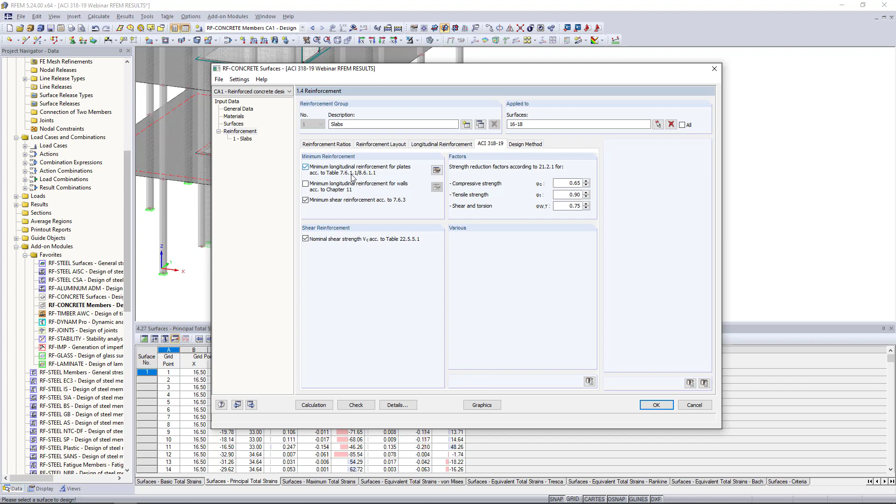The ACI 318-19, specific to this standard - we're going to see here the minimum longitudinal reinforcement for plates according to 7.6.1.1 and 8.6.1.1 for one-way and two-way slabs. We are going to want to keep that for today to take into consideration those minimums.

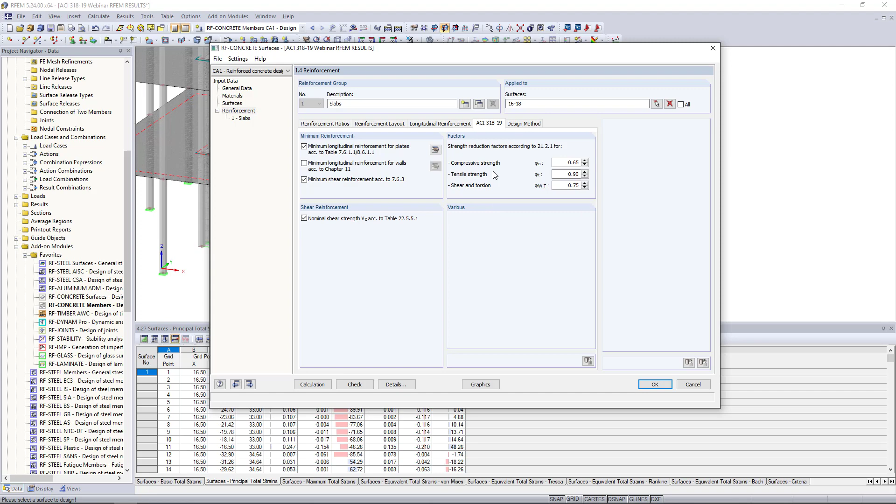If we were designing our walls, we'd probably want to uncheck this and check this option instead to use the minimum longitudinal reinforcement for walls according to Chapter 11. Minimum shear reinforcement is according to 7.6.3. Shear reinforcement according to table 22.5.5.1, as well as the strength reduction factors, all come directly from the standard.

For the design method, we're going to choose the optimization of design of internal forces for parts loaded mostly by bending or tension, and we are ready to run our calculation.

For the sake of time, I am going to jump into an already saved model here, and you can notice that it's just taking a minute to load these saved results. So let's just give the program one minute.

Essentially, once again, we are going to take all of the internal forces from the RFEM analysis, but RF Concrete Surfaces is a little bit more complex with what we're seeing than with RF Concrete Members. So it does take the program just a minute to calculate those.

Jumping to this already saved model, what we will do here is go to the current module since it is selected from the drop-down. And what we will notice after we've run our calculation is our required reinforcement.

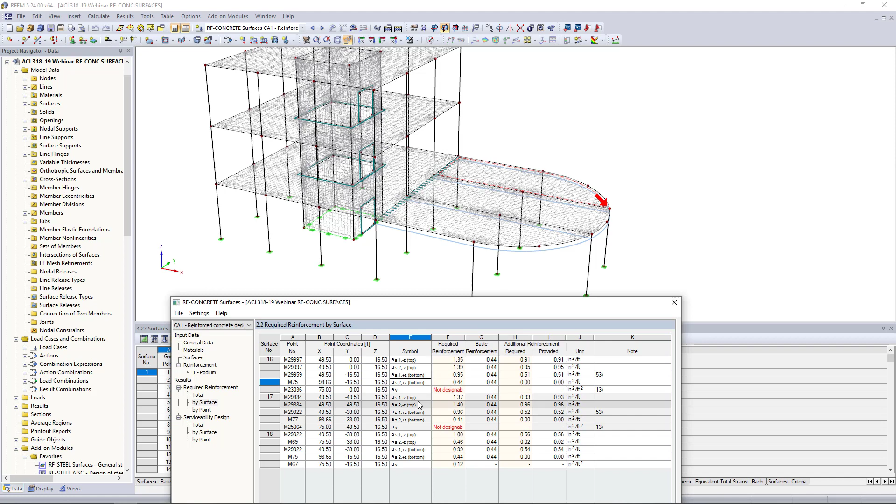And we can view this required reinforcement by surface, for example. Everything's kind of synced up here to show us our required longitudinal reinforcement for the top and the bottom, in both directions. This red arrow is showing you exactly where the controlling internal force is.

Now, of course, we can't help but notice this red text here that says that the shear is not designable. And when I click into this cell, it tells me the shear resistance cannot be checked because the cross section is entirely cracked. So this is obviously a problem, and we'll get to it in just a minute.

Notice we have the required reinforcement here from the calculation. We have our basic reinforcement, which is my number 6s at 12 inches. And then we have an additional column here that says, okay, you still need to provide an additional so many inches squared of reinforcement here in order to meet this required reinforcement. So that's given here.

Also notice that we can view this drop-down box according to the ultimate or the serviceability limit state design. When we are in one of these options, ULS, we can click this info button here. This info button will allow me to expand all of the information that went into these calculations. So you can see that it's rather complex with all these different trees.

We can view the shear design. We're also going to give you really as much information as we can from the standard, where all the variables are coming from, code references if they're applicable. So this is certainly something if you want to understand a little bit more detail.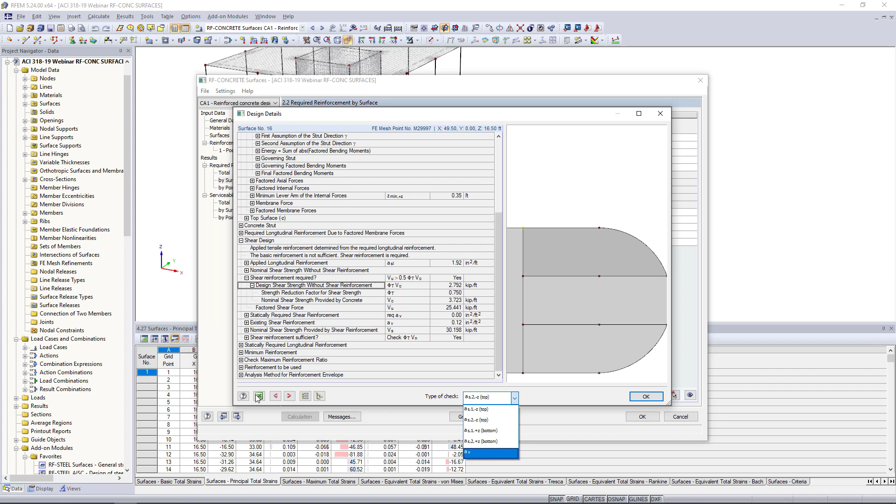We can also take a look at any one of the longitudinal reinforcements, and we can export this to Microsoft Excel to really understand where our numbers are coming from.

Under the serviceability design, just like what we saw with our members, we can view by surface our deflection checks, spacing requirements for our longitudinal reinforcement, and crack width calculations. Everything's passing quite well with a max ratio of 0.7, shown with our green smiley face. We can click on this info button to get information for the serviceability, including all the information that went into determining it.

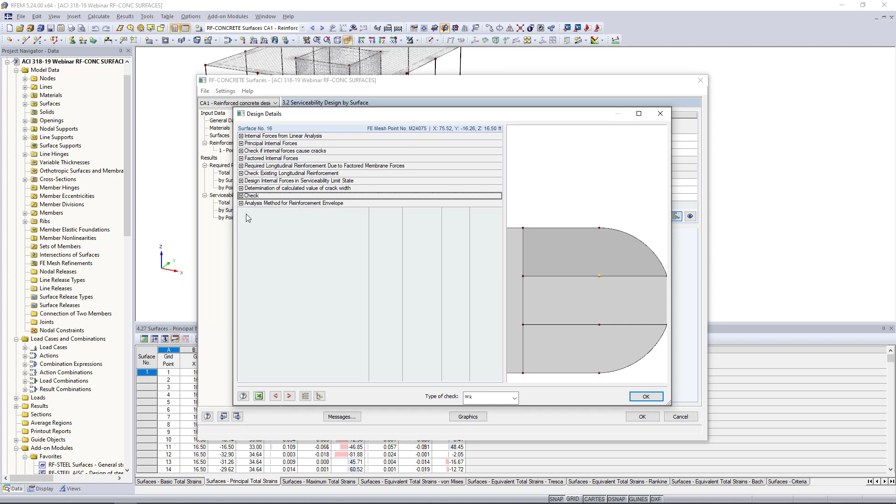Once we're done taking a look at the serviceability, let's jump back to the non-designable. Again, this is a problem, so I think what's easiest here is to take a look at our graphics view.

We're currently viewing our results according to RF-CONCRETE surfaces graphically. What's nice is we can view the required reinforcement for our longitudinal reinforcement in both directions. You'll notice this red arrow showing us which direction these are spanning, and we're getting inches squared per foot in these nice contours.

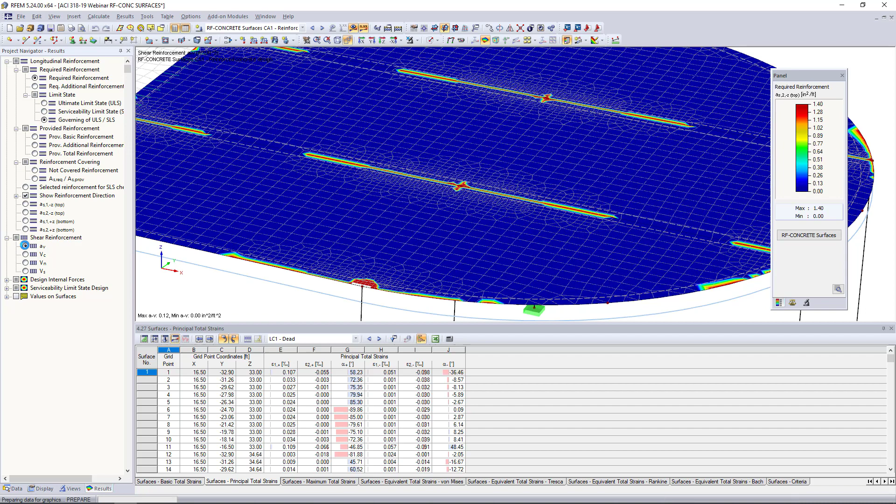Under the required reinforcement, we want to view the shear reinforcement. What we're seeing here is that a majority of this slab is fine - we don't need any shear at all. But the problem is where these 1D member elements are framing into these 2D surfaces.

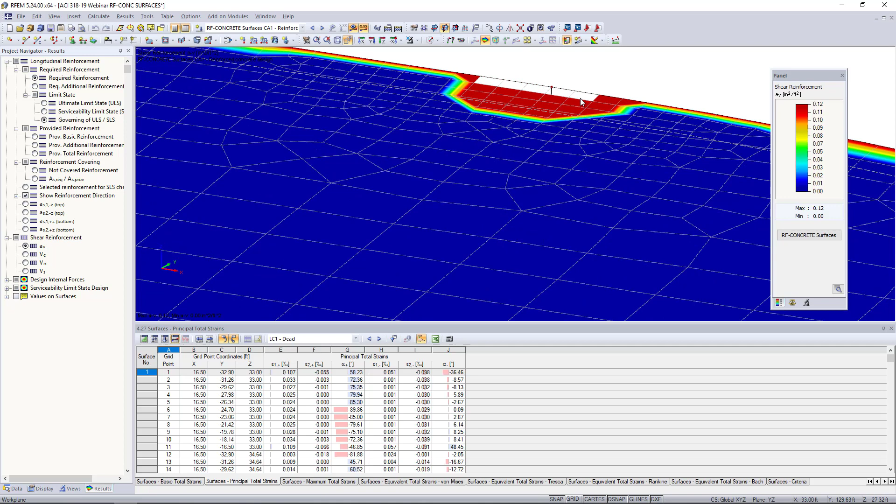If we zoom in here, we're getting very high concentrations for our shear reinforcement, and these areas that are not colored are where the cross section is completely cracked. So we would term this a singularity.

If we turn off our results, singularities occur because we have this column framing into this surface at this one single FE mesh point. There's absolutely no load distribution based on the true rendered section here. If we look at it, it's a 12 by 12 section, so technically we should get better load distribution than what we're seeing here.

But it's an FEA program - this is the same for any FEA program. So we need to instead consider this load distribution in another way, and we'd want to do so with what's called an average region.

In the project navigator, we have the ability to add a new average region by right-clicking on it. And this is exactly as it sounds - we're going to average out the internal forces over a set area.

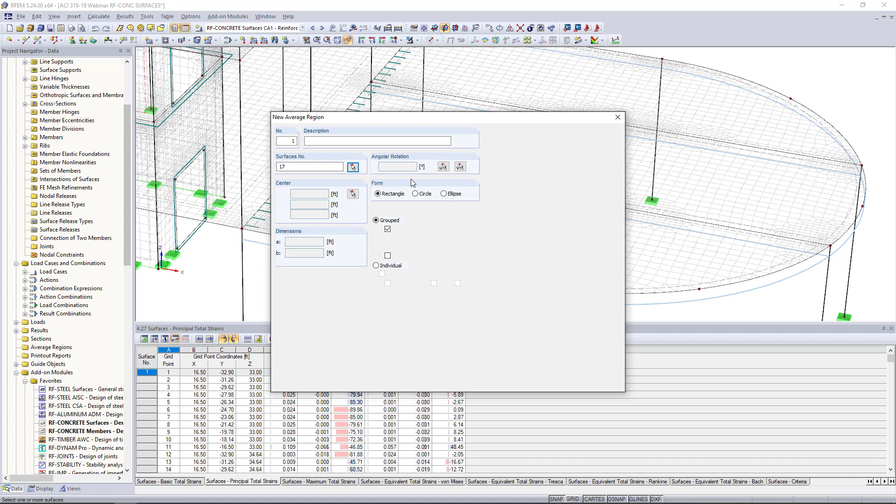The first thing I'll do is select this surface here, surface number 17, and I'm going to set this to a rectangular section with dimensions 1 foot by 1 foot, so we can consider better load distribution of our 1 foot by 1 foot columns.

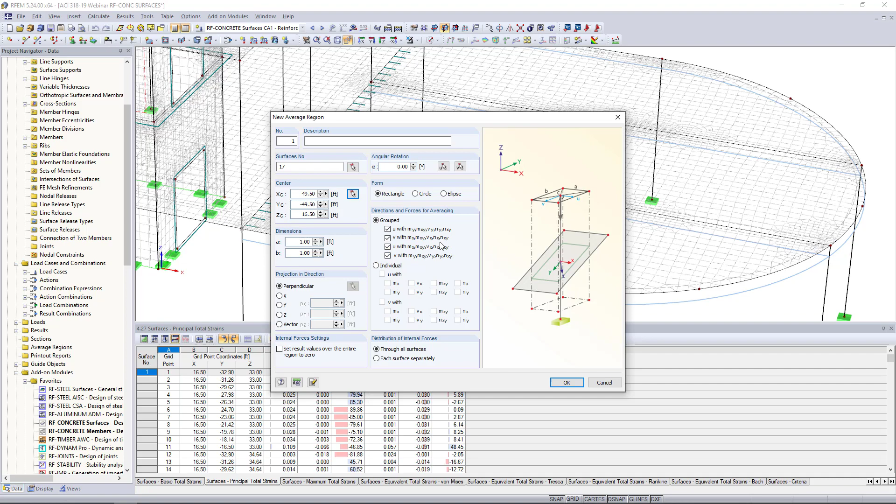I'm going to select my average region to be applied to this nodal point. The coordinates are automatically populated here, and we're going to average out internal forces in all directions. I click OK, so now if I zoom in here, I can see my average region applied right to that corner.

I can hold down my control key and drag and drop to make a copy of this average region. What I need to do here is select not only surface 17, but also add surface 18. When I click OK, you'll notice this average region now considers both surfaces.

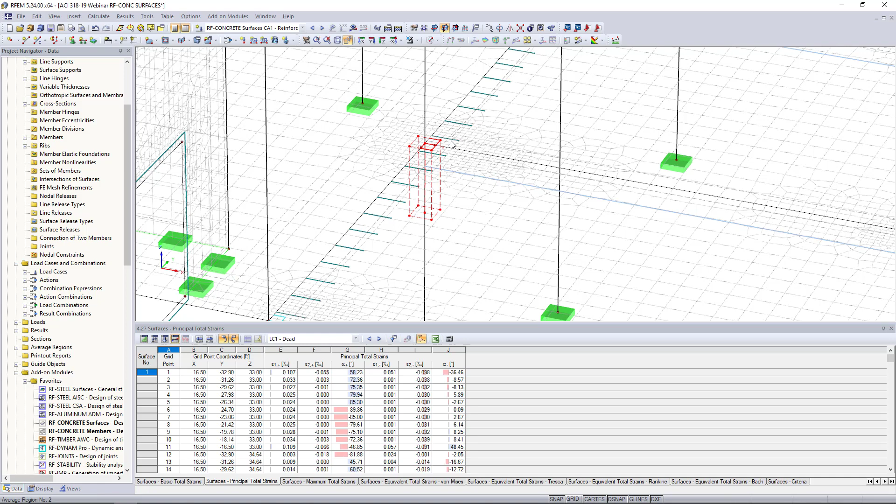I'm going to once again make a copy over here - and I selected the wrong thing. Let's take our surfaces as surface number 18 as well as 16. And finally we have one more average region to give - I'll highlight it, hold down my drag and drop, and adjust our surfaces once again, selecting just surface number 16 here.

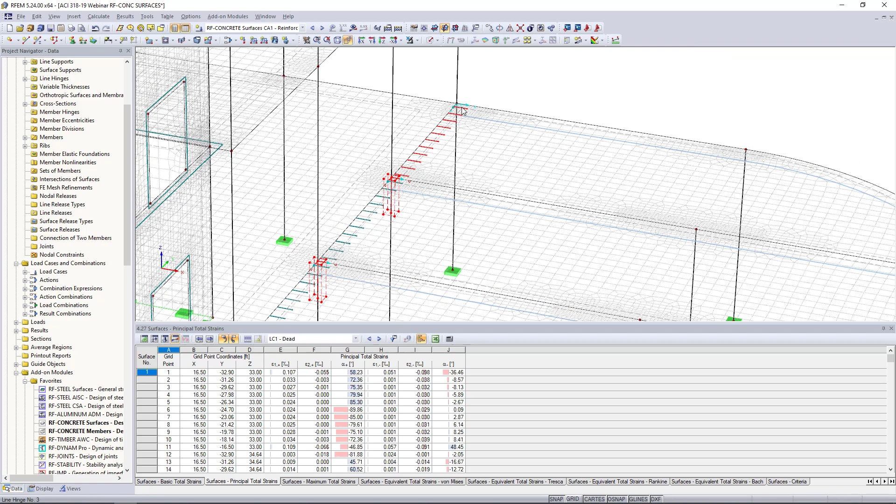Once we're done with these average regions, we can take a look at each one by holding down the control key, and we have the ability to continue holding it down, drag and drop, and make a copy. I'll do the exact same thing here. Notice I don't need to make any modifications to my surfaces because they're still applicable.

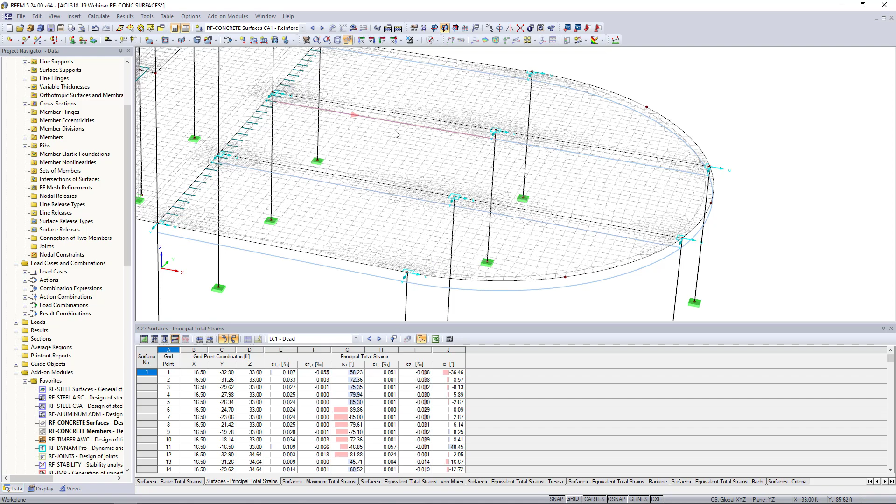I've now applied these average regions at each location where these columns are framing into my surfaces. You'll notice that within my results here, I don't necessarily need to rerun the calculation, because we're not making any modifications to the actual analysis results.

We're just smoothing out these high stress points. So when we go back into RF-CONCRETE surfaces, we're going to need to make a couple changes.

I'm jumping to an already saved model, and there's a reason for that. If I go to RF-CONCRETE surfaces, under the details setting, if we do not set this checkbox, the program will automatically ignore those average regions.

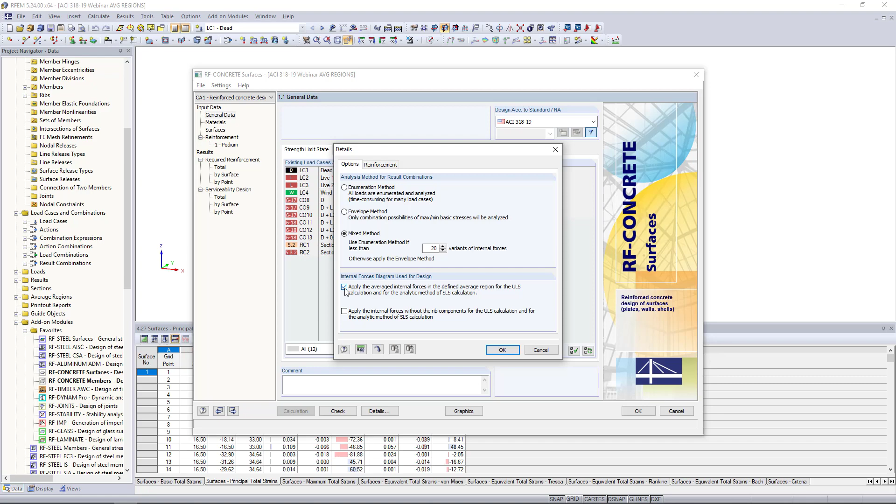So after we've applied them, we go back into this add-on module. We check on this checkbox to consider average regions for the ULS and SLS design. We need to rerun our calculation, and then we'll be presented with our results here.

Now notice, we've improved the shear design. We no longer see that non-designable result, but we've also improved the longitudinal reinforcement because we had high stress, high singularity and internal force concentrations at those column locations, even for bending. So this really improved our design quite a bit.

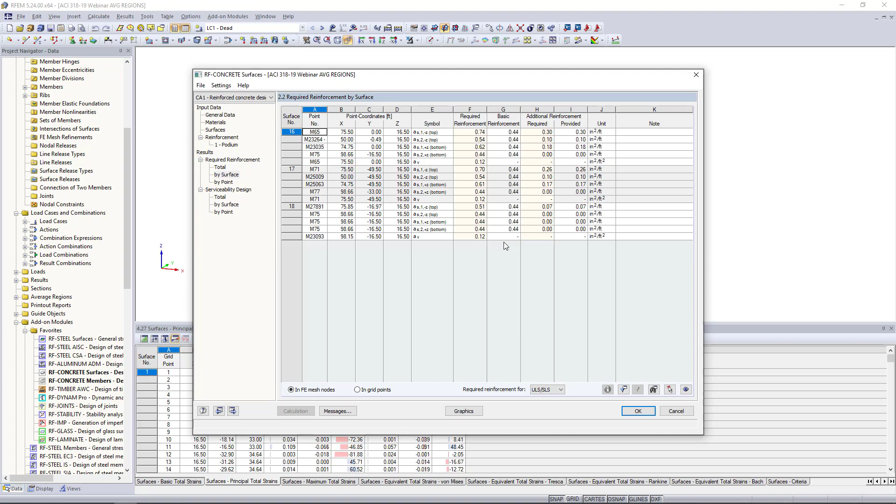Okay, so that really sums up the overall surface design. Now, there's just one more thing I want to mention, which we don't have time for today.

So I wrote this article more recently. The question comes up from time to time, do you consider design strips within the program? We actually don't use the method of simple one-way design strips for reinforcement design for surfaces. But I explained the RF-CONCRETE surfaces approach and a couple different considerations if you wanted to take more of the design strip approach, what you can do within the program.

And that's with average regions. I explained the benefits as well as the pros and cons for this option. Probably the more simple application is with result beams. So this can be incredibly helpful. You can even download the model I used for this article if you're wanting to read more about it and design strips. So certainly refer to that.